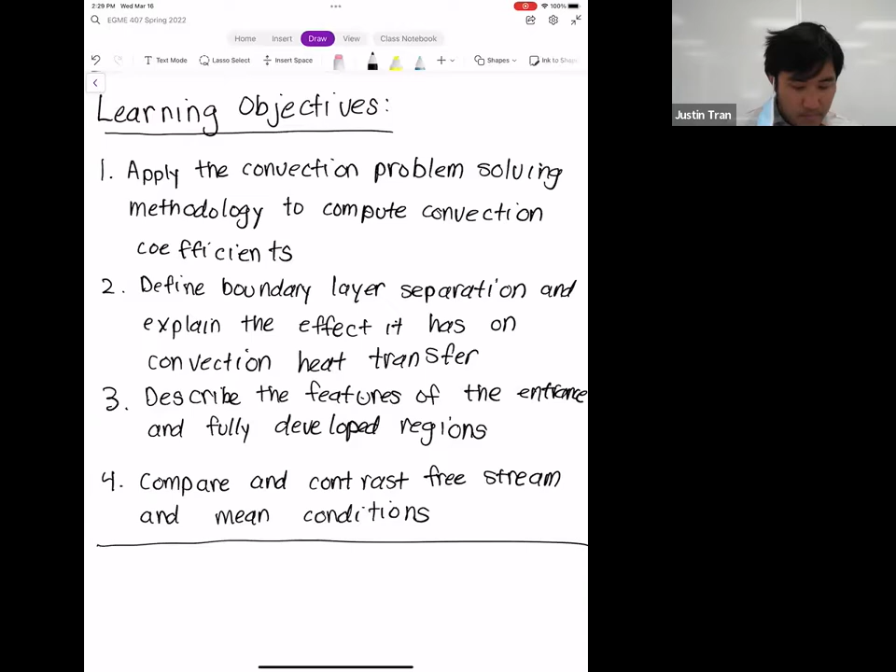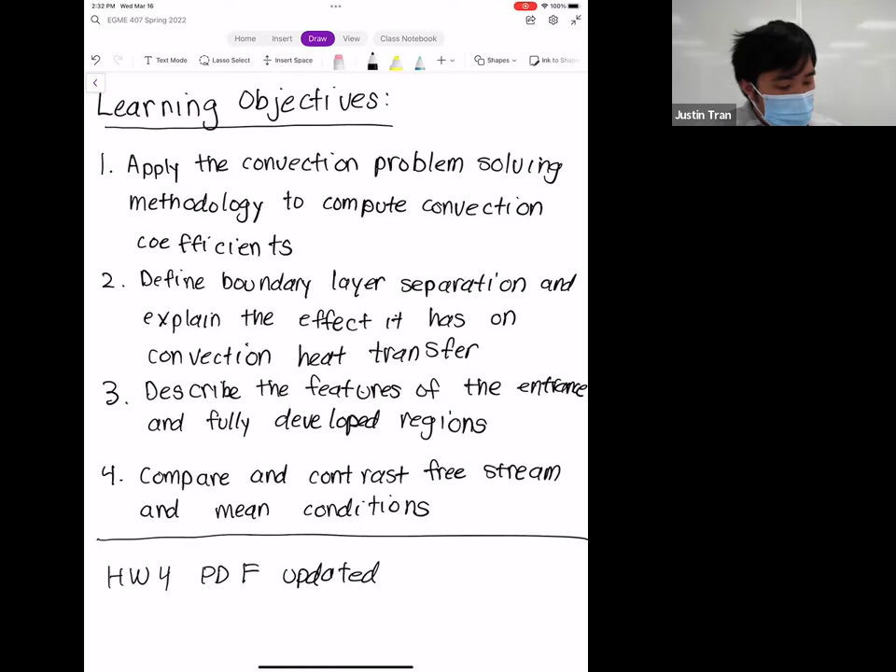Okay, let's go ahead and pick up where we left off. So the last thing we covered is what I call the convection problem solving recipe. A lot of convection problems will break down into these five separate steps.

The first thing you're going to do is identify the geometry. Next, compute the film temperature, where remember the film temperature is the temperature at which you evaluate the fluid properties. Third, you compute the Reynolds number, and use that Reynolds number inside the Nusselt correlation. Then you use that Nusselt correlation to compute convection coefficients and all that good stuff. This should be from the end of the notes last time.

I don't want to write it again, but I do want to jump into an example which shows this process in action. Let's go ahead and jump right into it then.

I like this example a lot, it's one of my more favorite examples in the class because I think it's pretty practical. I haven't done this before, but I do aspire to do this one day. This could help you in designing your own rig. If you're interested in PC gaming like I am, probably one thing you've thought about at some point is designing your own PC, and part of that is designing the cooling system. So we're going to be designing that in this problem.

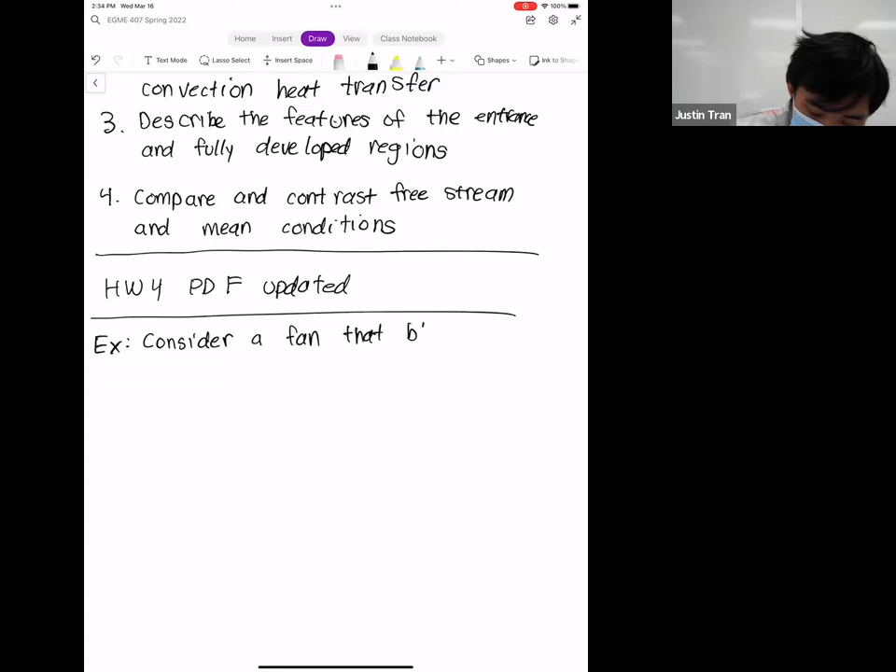In particular, we're going to be worried about the design of the fan that's going to blow air over our fin. This fin might be something like a thermal sink that you use on your computer to cool it. Anytime you build a computer, you have to have some kind of air cooling, or some use water as well, to cool your parts.

What we're interested in this problem is computing how fast the air velocity needs to be in order to properly cool our part. So the velocity here is going to be unknown. What we do know is that the air temperature is going to be a cool 20 degrees C.

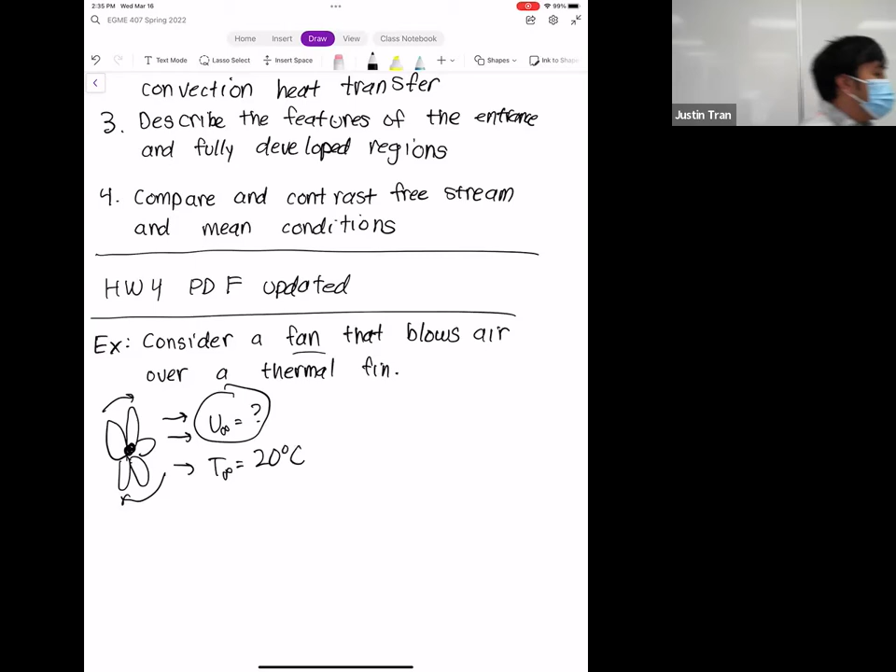And what this is going to be cooling is, the only geometry we can do so far is a flat plate. This flat plate is going to represent some kind of fin, and it's going to be at a constant surface temperature Ts, where the surface temperature of this fin is going to be 45 degrees C.

Let me give you some geometric properties. The length of the fin is going to be 10 centimeters, and the width of the fin going into the page—assuming it's a rectangular plate—is going to be 5 centimeters.

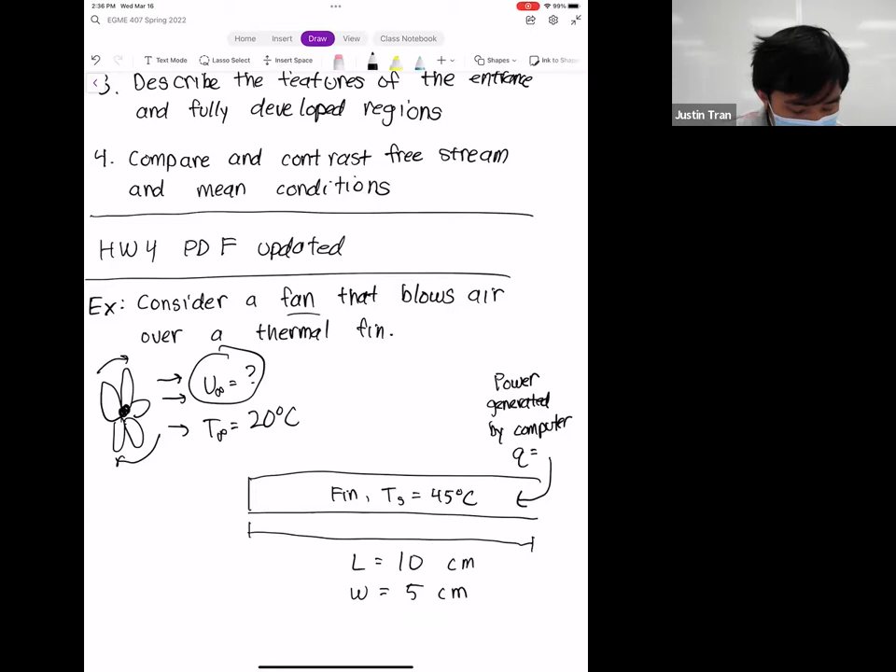Not only that, we also know the amount of power being generated by the computer, and that power needs to be dissipated in the form of heat. One way we can model that is to say that the Q coming in is going to be equal to 5 watts. We're interested in seeing how fast the air needs to go to offload that 5 watts of heat.

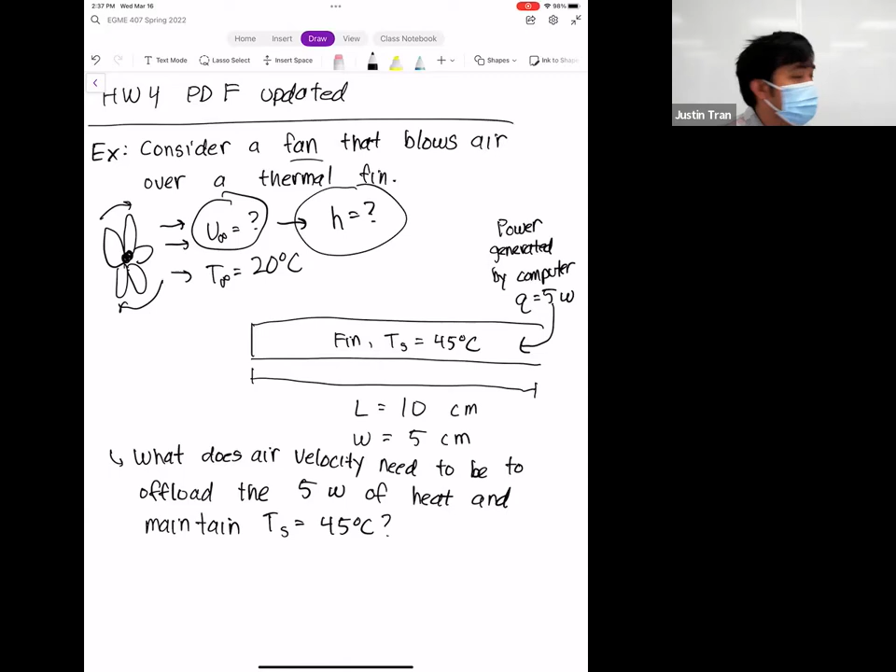It's going to be the amount of air velocity we need to offload that 5 watts, but also to maintain that surface temperature of 45 degrees C. It's a little bit not as direct as some of the previous problems we've been doing, because we're solving for velocity here. But what this essentially is, is solving for what the convection coefficient has to be in order for this situation to work out. It may not be as direct as before, but this fits into our category of convection problem solving, so we can apply the convection problem solving recipe to solve it.

Any questions with the problem setup? Okay.

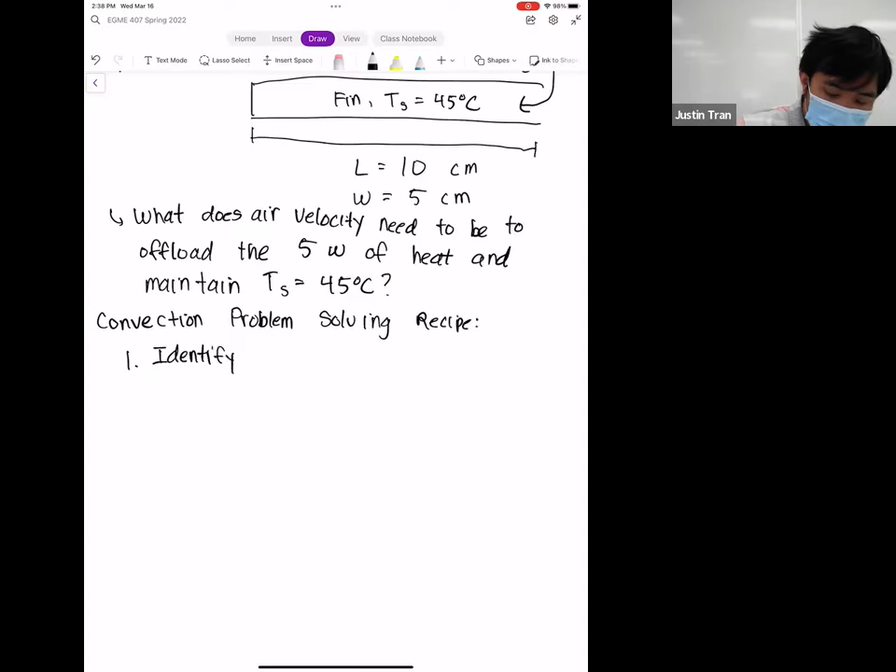All right, so let's start with the recipe then. Step one of the recipe is to identify our geometry. Again, this is probably the most skipped step in this entire process, but I do want you to actually write this down. Here it's a little bit obvious since we've only gone over one geometry so far, but it's always good to write it down. Our geometry in this case is one of a flat plate, and you can identify that from the figure of the problem.

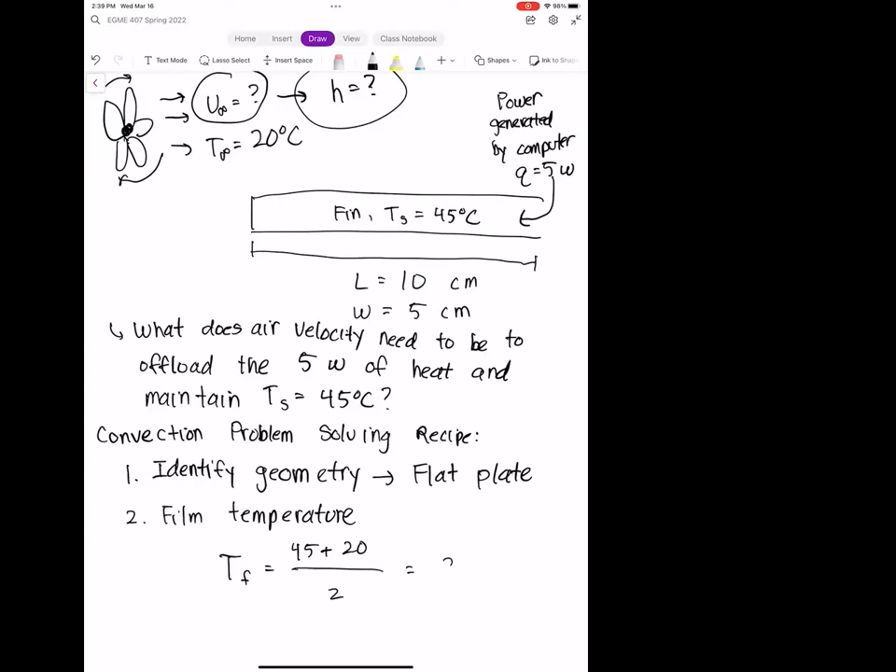So the next thing we're going to compute is the film temperature. Remember, the formula for that is the average between our surface temperature and our fluid temperature. Our surface temperature here is 45, our fluid temperature here is 20 degrees C, and we're going to divide this by 2. We get a film temperature of 32.5 degrees C, and that's the average fluid temperature between the free stream and the plate.

All right, so the next step is we're going to evaluate the air properties at this temperature. You can do that a couple of different ways.

If you have the textbook, you can go to table A4 in the back of the book. Or you can use the online fluids calculator I showed you last time. I put a link to that fluids calculator on the homepage of our course website too, so you can click the link there.

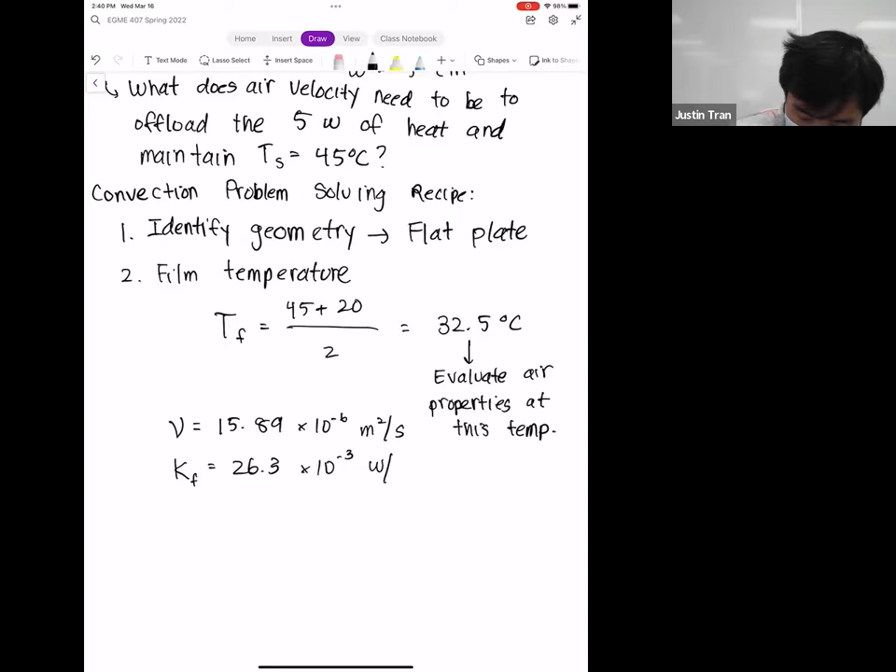If you compute those or look those up, you end up with a kinematic viscosity of 15.89 times 10 to the minus 6 meters squared per second. We get a thermal conductivity of 26.3 times 10 to the minus 3 watts per meter Kelvin, and you get a Prandtl number of 0.707.

All right, so that's great. Now that we have the fluid properties, we can move on to the next step.

The next step is to compute the Reynolds number. Remember the formula for the Reynolds number is U infinity multiplied by the length divided by nu.

Here's where this problem is going to be a little bit different, because usually at this point you'll have everything you need to plug in to find the Reynolds number. But for this problem, we don't have everything, because what we're solving for is U infinity, and we don't have that because we're solving for it. So we can't solve for this yet.

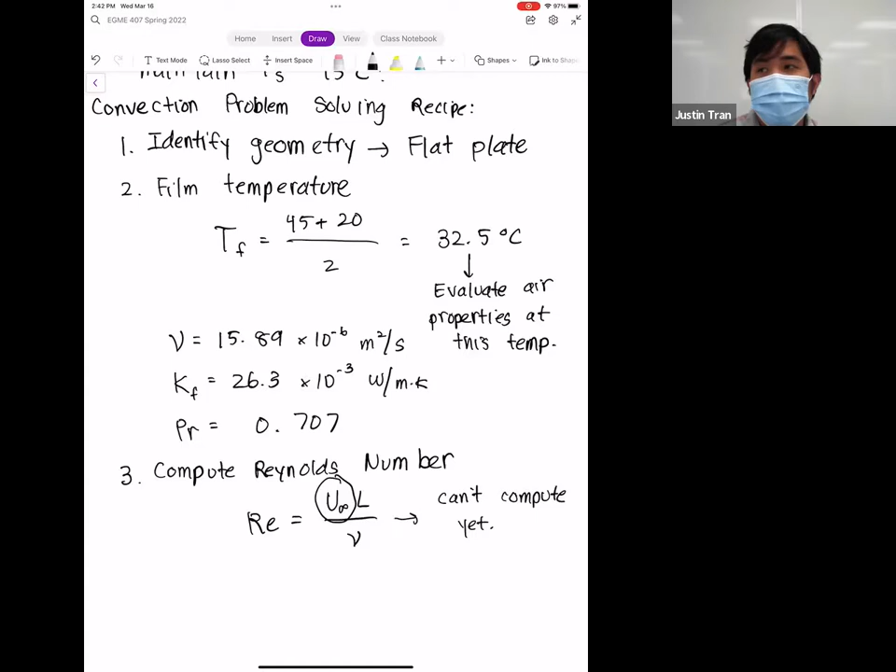And that presents a little bit of a problem for us, because at this point we have to make a decision on whether our boundary layer is going to be laminar or turbulent. But without the Reynolds number, we can't really make that determination definitively.

So at this point, we're going to make an assumption. Just because it's a little bit easier to deal with, we're going to assume that it's laminar.

Later on, once we solve for the velocity, we're going to go back and verify that it's actually laminar. So if you ever run into a situation like this where you have to make an assumption of whether it's laminar or turbulent, a lot of times it's good to take a step back and look at your physical situation.

Our physical situation here is basically the flow of air inside a computer. It's a fairly confined space, and those fans aren't like those mega fans you find in a Dyson vacuum. It's just one of those little dinky fans that are blowing air, and those things can't really blow air super fast.

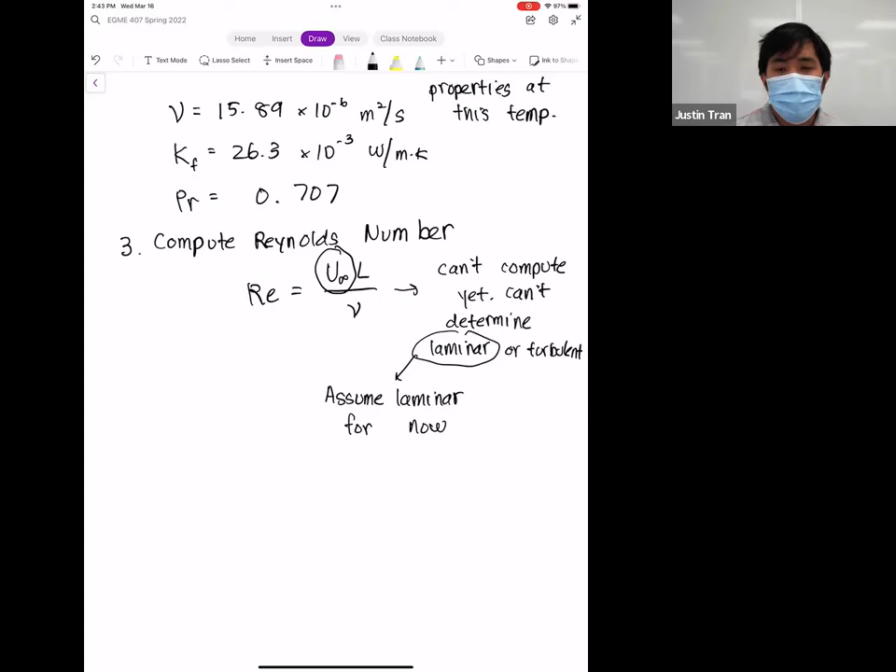Based on the fact that our space is relatively confined and our velocities are probably going to be relatively low, the laminar assumption is pretty reasonable here. In fact, I'd be pretty surprised if you ever got the flow to be turbulent in such a small space. So we'll assume laminar for now, but we'll go back and verify it later.

So let me pause here. Are there any questions on this so far? Yeah.

It depends on the situation, but for a lot of the problems, and for the homework problems especially, you'll have the velocity already. At that point in the problem, if you have the velocity, the length, and the viscosity too, you can just compute outright what the Reynolds number is. But for situations where you do have to make an assumption, just look at the situation.

Let's take another extreme: say you're looking at airflow over an airplane. The airplane's going really fast and it's really big, so in that situation I'd say it's most likely going to be turbulent, and the assumption of turbulence will be good in that case.

Most of the time you won't have to make this assumption, but we're going to do that here for this problem. Okay, so let's go on to the next step.

So the next step is we have to make a determination whether we want a local Nusselt number or an average one.

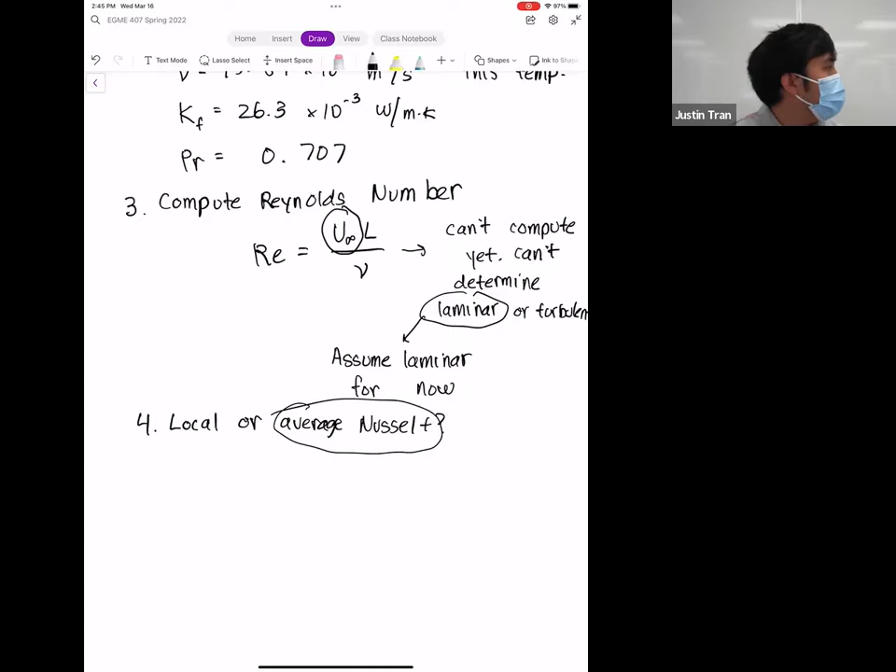Like I said last time, most of the time for most of these problems, you're going to want an average Nusselt number. Just because the nature of the problems we're looking at in this class, we're looking at systems as a whole. So if we go back to this problem, what we're interested in is the heat loss from this fin as an entire system. In situations like this, when you're interested in systems as a whole, most of the time you're going to want the average Nusselt number, which gives you the average convection coefficient.

Of course, there are situations where you want the local one, but for analytical methods like this, that's pretty rare, I'd say. So most of the time you're going to want the average. That's important because there are different Nusselt number correlations depending on whether you're working with the local or the average Nusselt number.

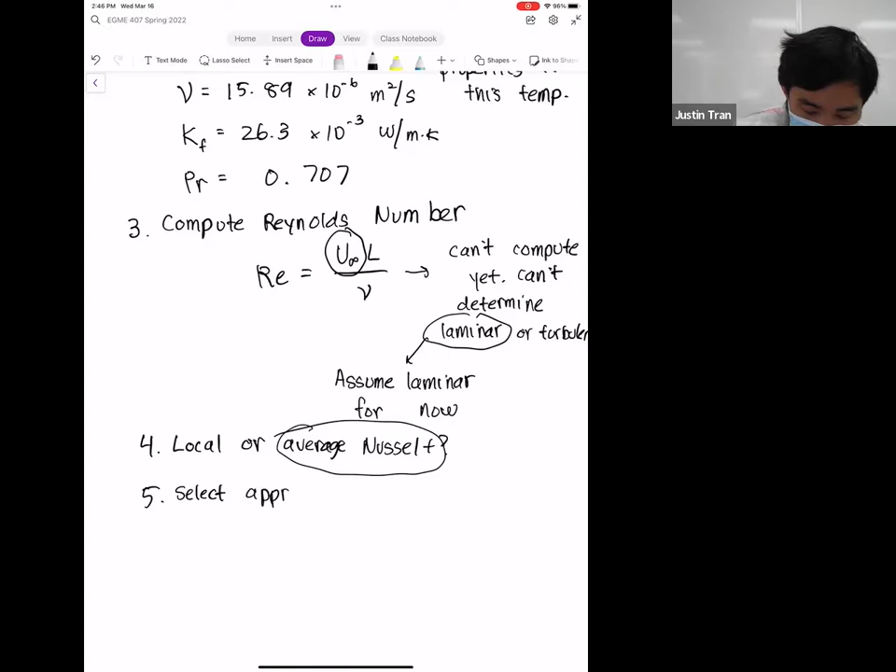So with that in mind, now that we know, or at least are assuming, that the flow is laminar and we want the average Nusselt number, we can go ahead and select the appropriate Nusselt correlation. Because remember, there are lots of different formulas out there for the Nusselt number, so you have to pick the right one for the situation. For this particular problem, we have laminar flow.

We want the average one, and our geometry is that of a flat plate. So we look at our list of all the Nusselt number correlations that we have, and we use the following one. Our appropriate Nusselt number correlation here is 0.664 times Reynolds number to the 1/2 power times Prandtl number to the 1/3 power. This is the correlation that corresponds to all of these conditions.

If we go off the definition of the Nusselt number, it's the convection coefficient multiplied by the length divided by the thermal conductivity.

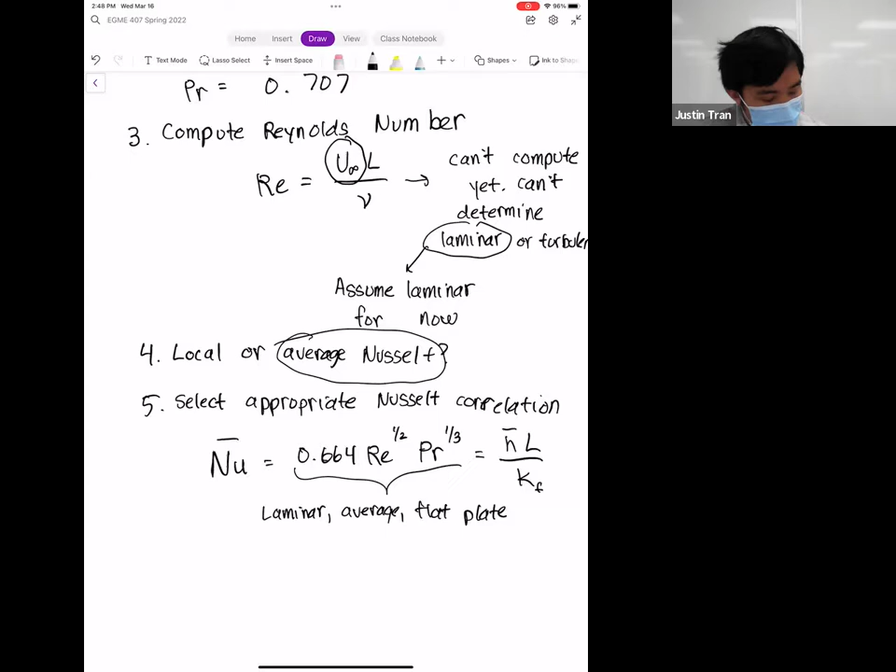And so here, we've made some good progress towards the result, but we still have a bit of work to do, because we don't know what the Reynolds number is yet, so we can't plug into this formula outright. But what we can do is use this expression along with other information we know from the problem to eventually compute that velocity. So to show that, let me plug in for the Reynolds number here.

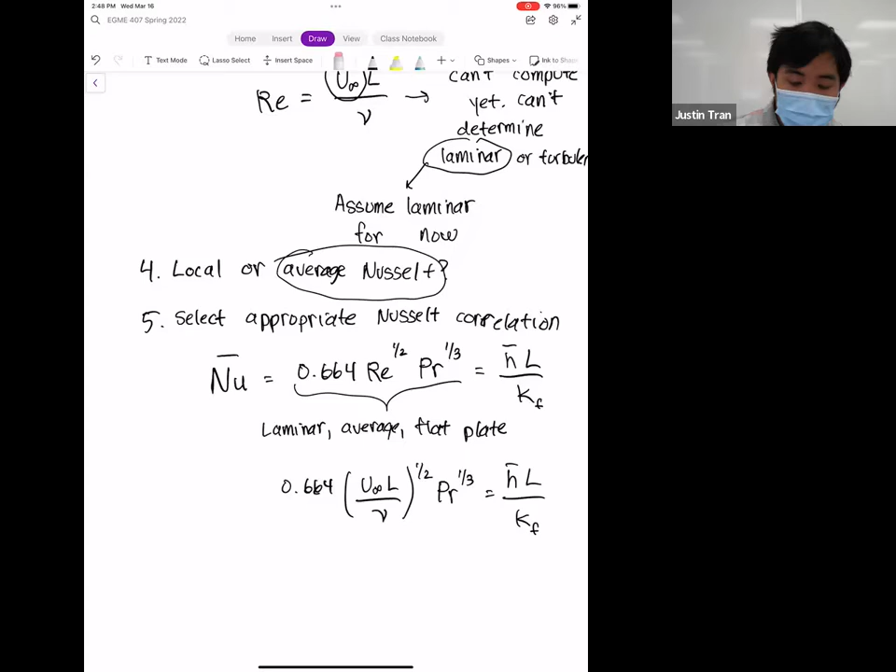If I plug in the expression for the Reynolds number, we see that the Reynolds number is U infinity times L divided by nu. We can see here that we finally have an expression where we can solve for U infinity, because remember, U infinity was our unknown. So let's take this expression and solve it for U infinity.

So let me divide both sides by 0.664 and the Prandtl number. What we have is U infinity times L divided by nu, to the 1/2 power, is equal to H bar L divided by 0.664 times Prandtl number to the 1/3 power times thermal conductivity.

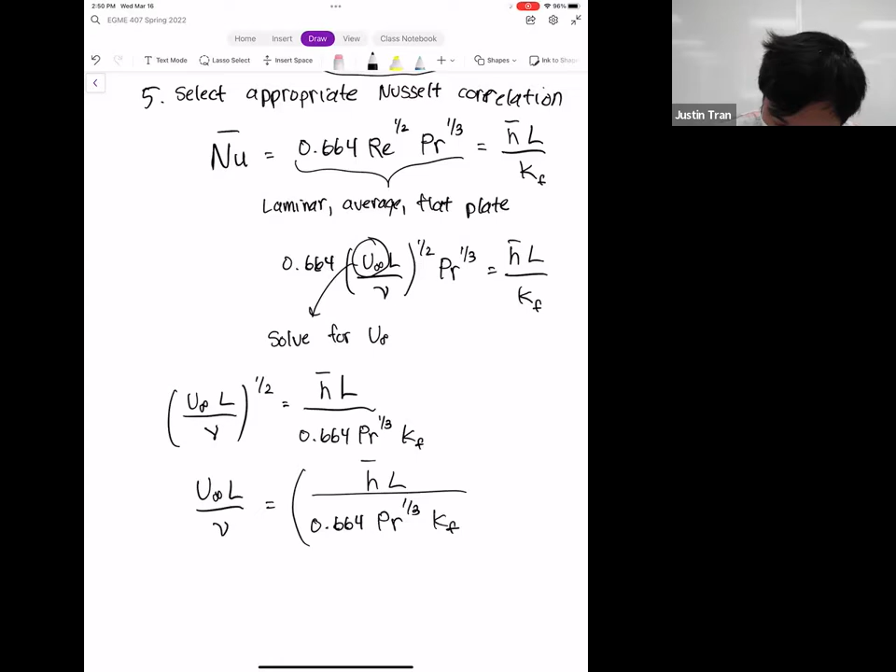So let's square it. If we square it, we get U infinity times L divided by nu is equal to the quantity H bar L divided by 0.664 Prandtl number to the 1/3 power, times Kf, squared.

And so let's isolate U infinity. Let's multiply both sides by nu and divide by L. In the end, what we get is U infinity equals nu divided by L, times H bar L divided by 0.664 Prandtl number to the 1/3 power, times Kf, squared. Of course you have an L squared on top and an L on the bottom, so you can cancel that if you want, but I'll just leave it in this form.

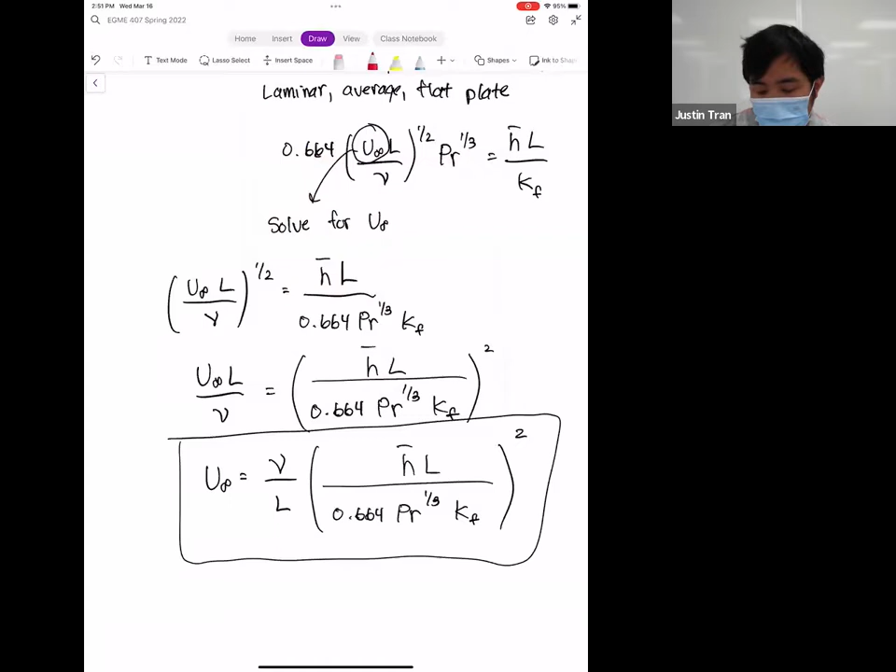So what we've done so far is that now that we know what Nusselt number correlation applies to this problem, we just use that correlation to solve for the unknown velocity. A lot of these quantities we can plug in: the kinematic viscosity, because we solved for that in step 2; the length we know from the problem; the Prandtl number and the thermal conductivity we also know from step 2. But the big elephant in the room, the one we don't know yet, is H bar. So in order to properly solve this problem, we need to solve for a value for H bar.

Except spelling is hard. Okay.

We're going to have to come up with a way to compute the convection coefficient based on the information that we have in the problem.

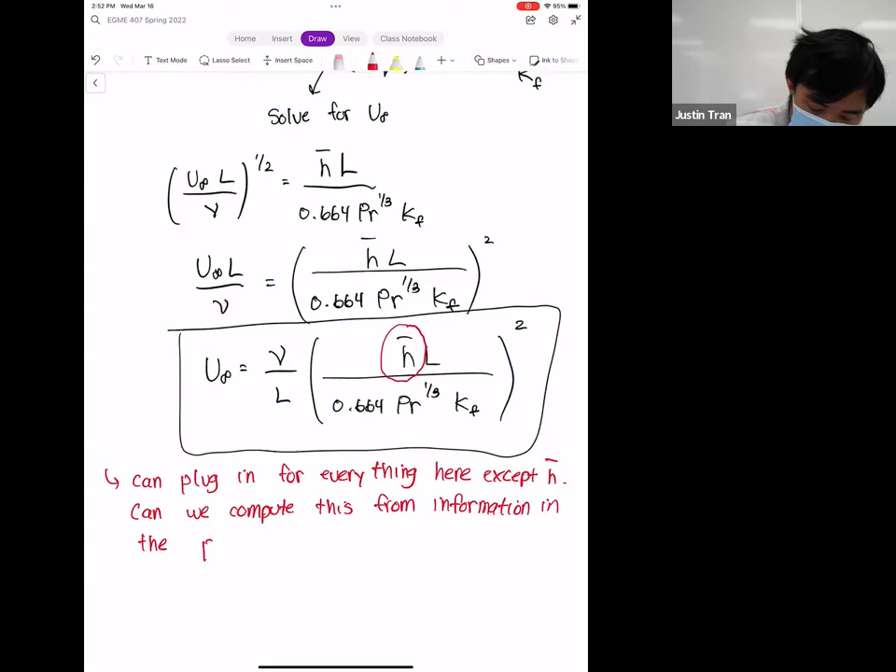If we can take the information that we have in the problem and use that to compute H, then we can just plug that in here and eventually solve for U infinity. Any questions on this so far?

Let's scroll back up here and look at the problem. What do we know from the problem? We know that the fin is going to have a surface temperature of 45 degrees C, and we know that the air surrounding it is going to have a temperature of 20 degrees C.

But we also have one other piece of information, and I kind of glossed over it really quickly, but that piece of information will actually be key in computing H. And that piece of information is the amount of power that's being generated by the computer.

So usually we don't have that. Remember, for most of these problems, what we're given usually is the surface temperature and T infinity, and based on those two, and also on the convection coefficient, we have to compute Q. In this problem I threw you a little bit of a curveball and gave you Q instead, and you can use that information however you want.

Since we have Q, we have TS, and we have T infinity, we actually have almost everything we need to plug into Newton's law of cooling.

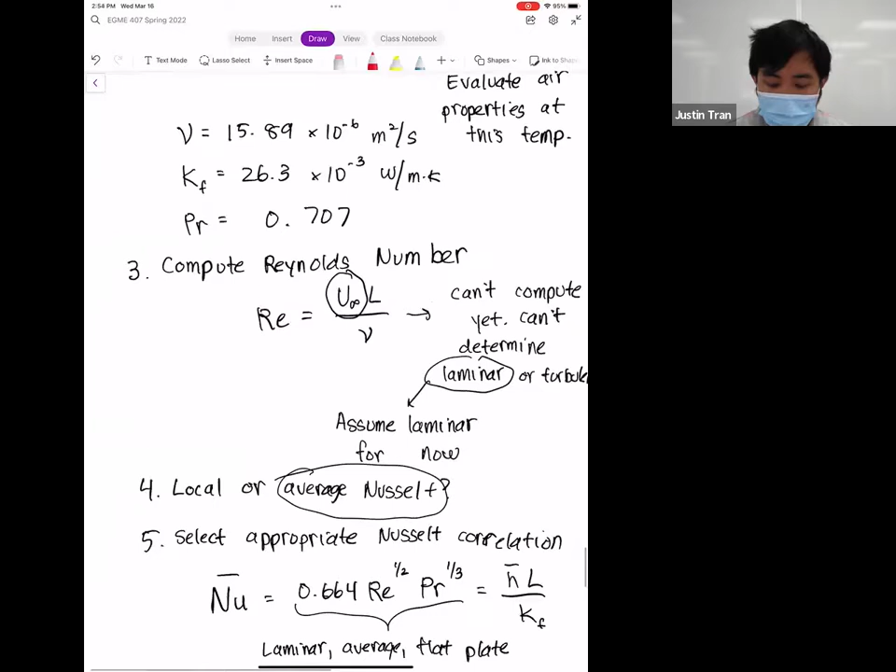What does Newton's law of cooling say? Newton's law of cooling says that the heat transfer due to convection is equal to H times A times the difference in temperature between the surface and the fluid.

Let's go through each term in this expression and look at which ones we know. Let's start with TS. We know TS is 45 degrees C. We know T infinity, that's the fluid temperature, so that's 20 degrees C.

Q, we actually also know as well. It's phrased a little bit differently. Remember, the problem phrases Q as the power that's generated by the computer. But that power has to go somewhere, it can't just go into the abyss. So what we're basically saying in this problem is that all the power being produced by the computer is coming out through the fin, and the only way that heat can come out from the fin is through convection. So we already have this one as well. The Q convection here is going to be the 5 watts generated by the computer.

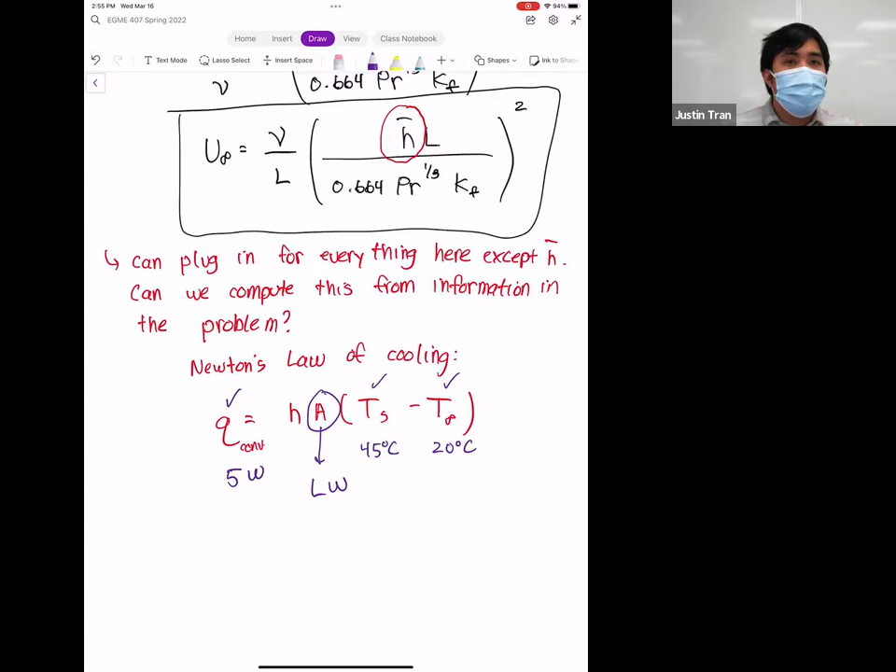We also know the area as well. The area is just going to be the length, because we have a rectangular plate, multiplied by the width of the plate. So L times W.

Now that we have an expression where we know everything except for one thing, we can use this equation to solve for that one missing thing. Let's solve this equation for H. What we get is H is equal to Q divided by L times W times TS minus T infinity.

This H that we compute here encompasses the entire fin, so this is exactly the H bar that we're looking for. We can take this H bar and plug it in back up here, and once we plug that H bar in, we'll have everything we need on that side of the equation. Now that we know H bar and everything else here in this formula for U infinity, we can plug it all in and solve for the velocity.

It's a lot of plugging in, a lot of numbers, so I'm not going to go through the whole thing. What we get is a U infinity of around 10.5 meters per second.

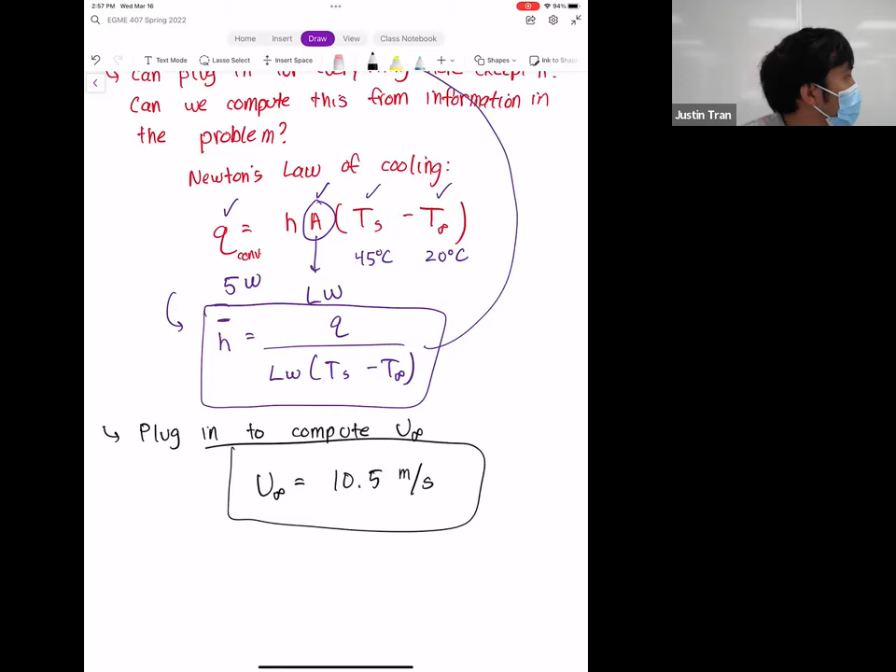And so the fan that you buy for your computer has to have a speed fast enough to at least produce a 10.5 meters per second wind speed. If you can buy a fan that does that, then your computer will be optimally cool and you can game as much as you want.

All right, so one last thing I want to check for this problem. Remember, the key step we made here is we had to assume that the flow was laminar. So let's just check to make sure that's the case.

If we plug in, we have the Reynolds number equal to U infinity multiplied by L divided by the kinematic viscosity. You plug all that in, we get a Reynolds number of 6.61 times 10 to the 4th.

And if you recall from last time, the critical Reynolds number for external flow like this is 5 times 10 to the 5th. So since we're less than that, and since we're only 6.61 times 10 to the 4th, we're good here. So this flow is confirmed to be laminar.

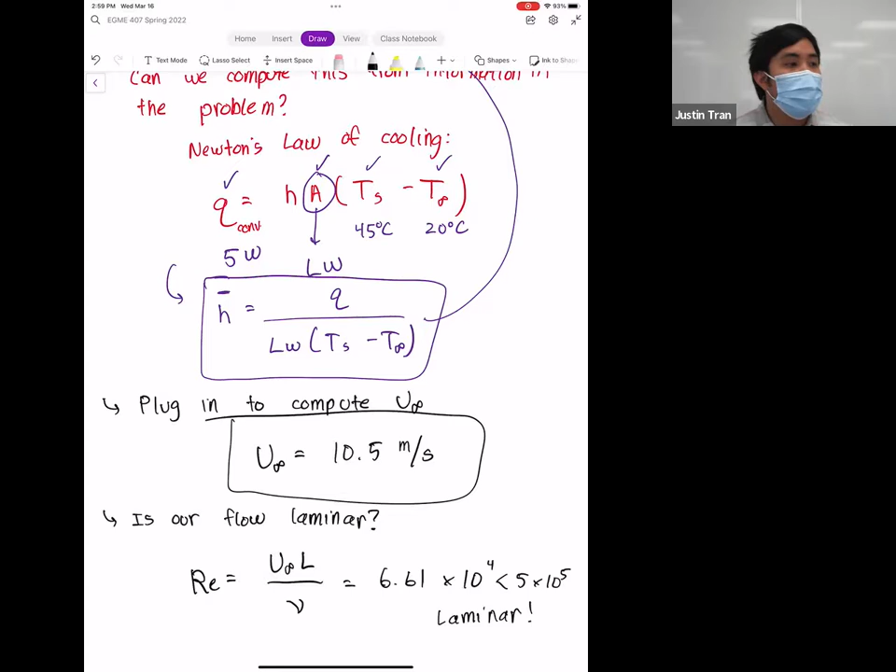All right, so that was quite an involved example. I wanted to make sure I go through it slowly and through every step because I think this is a cool one. It's maybe not the most straightforward application of the recipe because we had to do a couple additional steps, but I think it's a good demonstration of what these problems can be like.

All right, any questions on this example?

Okay, all right, and so that's going to do it for the flat plate, and so we're basically done with that flat plate geometry. Now let's start introducing some other flow geometries into our mix. One that's really important for the design of a lot of systems is the so-called cylinder in cross flow.

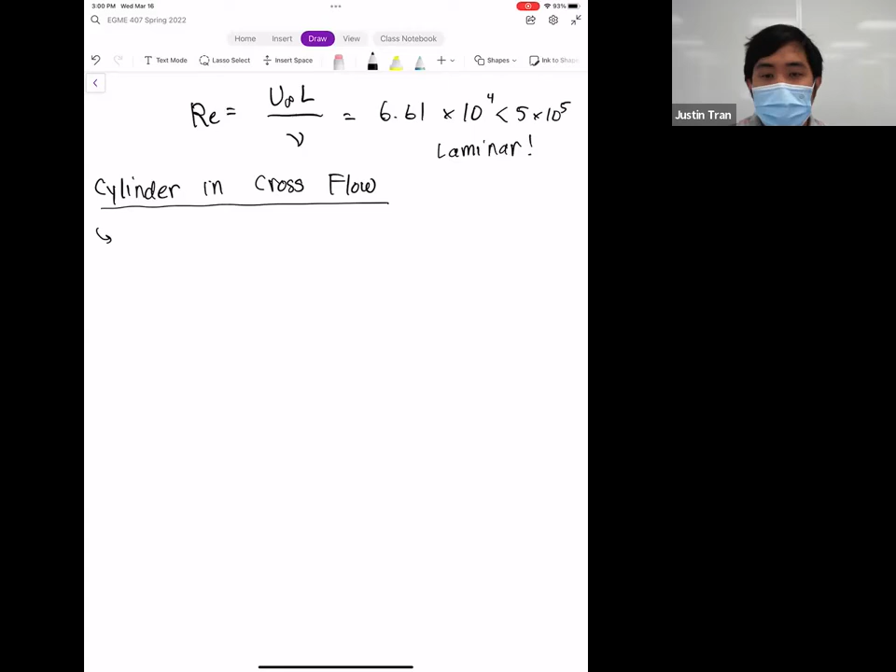All right, and so the important thing I want to note, because people get confused about this every single year: the next unit that we're going to go over after this is internal flow. One of the more common situations for internal flow is flow through a cylindrical pipe, that's flow inside a pipe. This cylinder in cross flow is flow outside a pipe.

So think about a pipe that's sitting on the outside, say on top of a building. You have wind flowing over the pipe, so you have convection occurring on the outside. That's the situation we're looking at. And for the flow of water inside a pipe, we'll do that maybe at the end of today if we have time, but definitely next week.

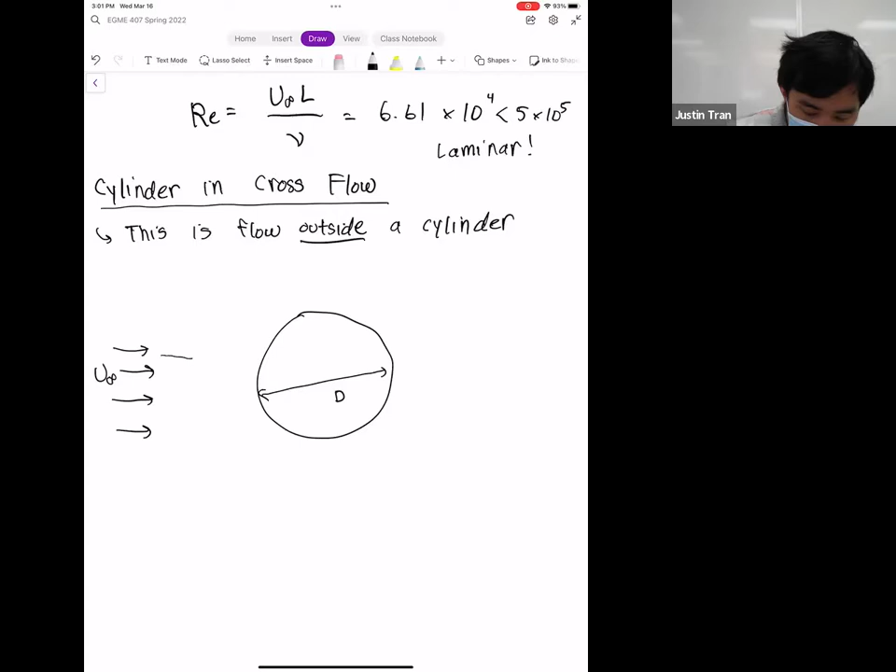All right, and so the situation looks like this. Here we have our cylinder, which has a certain diameter. We have flow that's going to be hitting the pipe from the outside. And what's interesting about this, more so than the flat plate, is that the velocity will kind of have to go around the cylinder. So you get streamlines that kind of look like this.

I like to go over this one because if you work in any kind of system that uses pipes, how you insulate the outside of those pipes from air and the weather is an important design consideration. So besides the flat plate, I think this is an important one for us to do.

All right, so what's unique about this geometry? Relative to the flat plate, of course, we're going to have different flow patterns. And since we have different flow patterns, that means our Reynolds number correlations are going to be different. So we're going to have different ways to compute the Reynolds number.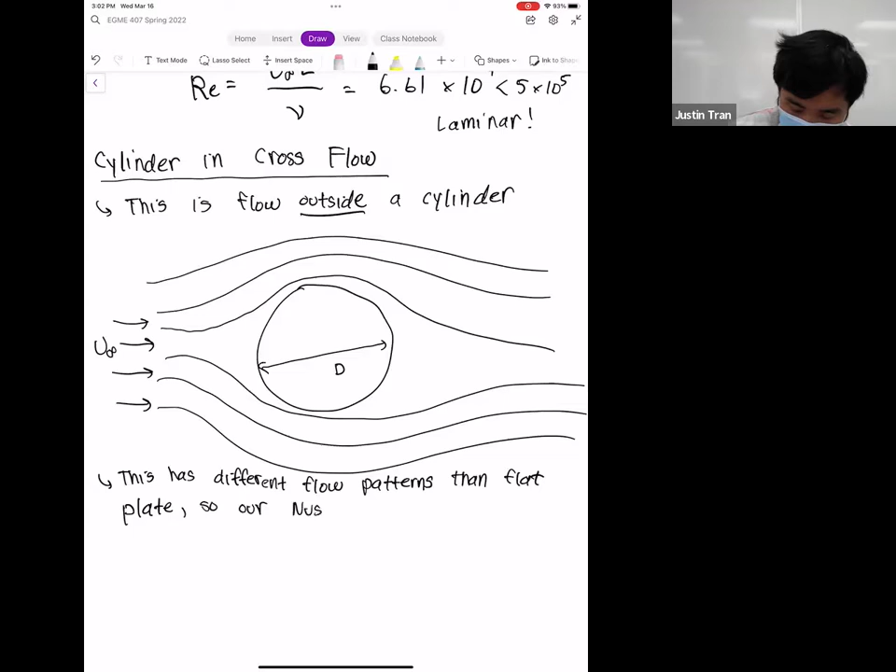And one of the principal ways that the flow patterns are different is we're going to have a new phenomenon known as separation.

Did you guys talk about boundary layer separation in your fluids classes before this? Mostly you've just heard the term before. Okay, that's good. So if you're curious, you've probably heard of stall in an airplane - that's when the plane goes up and just stalls, falling out of the air, which is terrible. One of the reasons stall occurs is because you have a boundary layer that separates from the plane. If you're interested in aerodynamics at all, boundary layer separation is something you'll be studying a lot. But here we're going to talk about the thermal effects of separation.

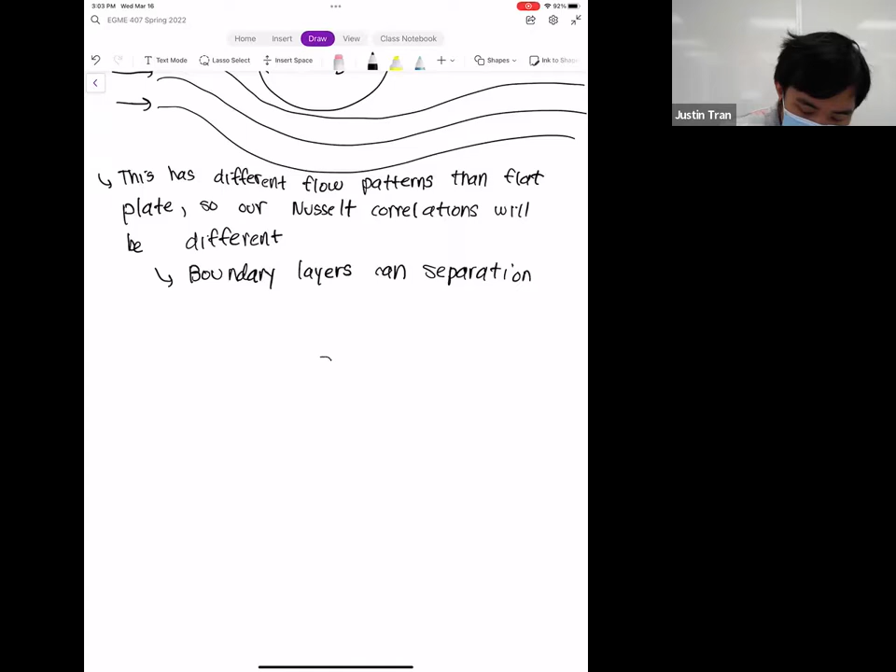I think the easiest way to illustrate this is with a picture. Let me draw our cylinder again, and we have flow coming at it. Just like the flat plate, whenever you have flow striking a surface or moving past it, you're going to have a boundary layer that forms. Let me draw the boundary layer with a different color to make it clear. Remember, the boundary layer is this thin layer of fluid that acts as a transition between the solid surface and the fluid. So here is our boundary layer.

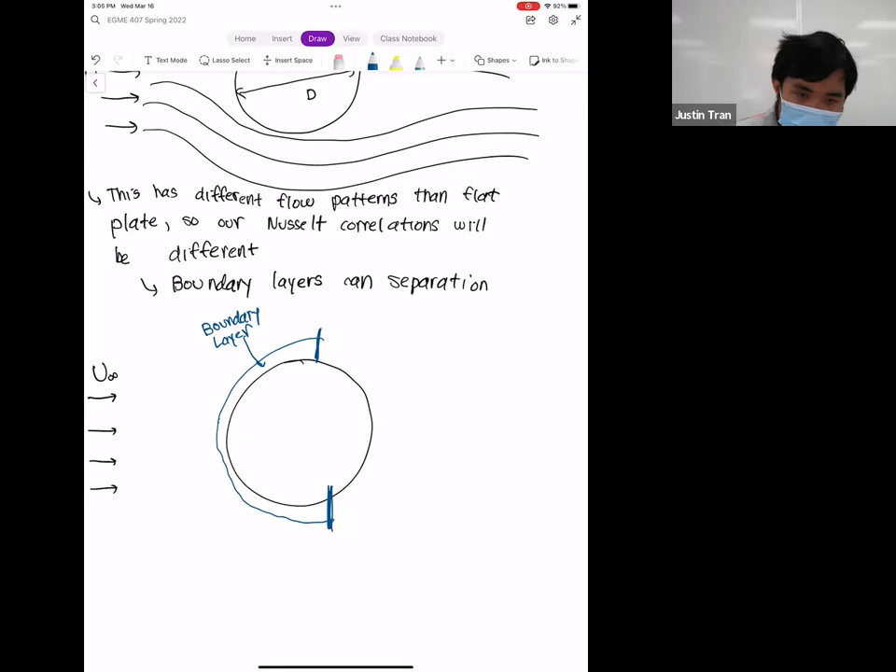Normally what we expect from the boundary layer - in the flat plate, remember it always stayed attached to the surface. There's always this thin film of fluid that stayed attached to our flat plate. But because of the geometry of the cylinder, most notably around this area, I stopped the boundary layer here on purpose - imagine that's the symmetric place on both sides. The fluid has to make an inward turn here. If you compare the front of the cylinder to the back, it's easy for the fluid to go around the front because the fluid is always colliding with the surface. The fluid wants to go from left to right, but as it does, it collides with this surface, and then it's forced to turn to go around.

But once the fluid makes it over the top, there's nothing really forcing it to stick to the surface, so you have a fundamental difference. If you're going to ask the fluid to turn this way, to stay with the cylinder more, it doesn't really want to because ultimately the flow wants to go from left to right. Once it gets past the top of the cylinder, nothing's really getting in its way anymore. So instead of staying attached to the cylinder, what tends to happen is the fluid just continues on like that.

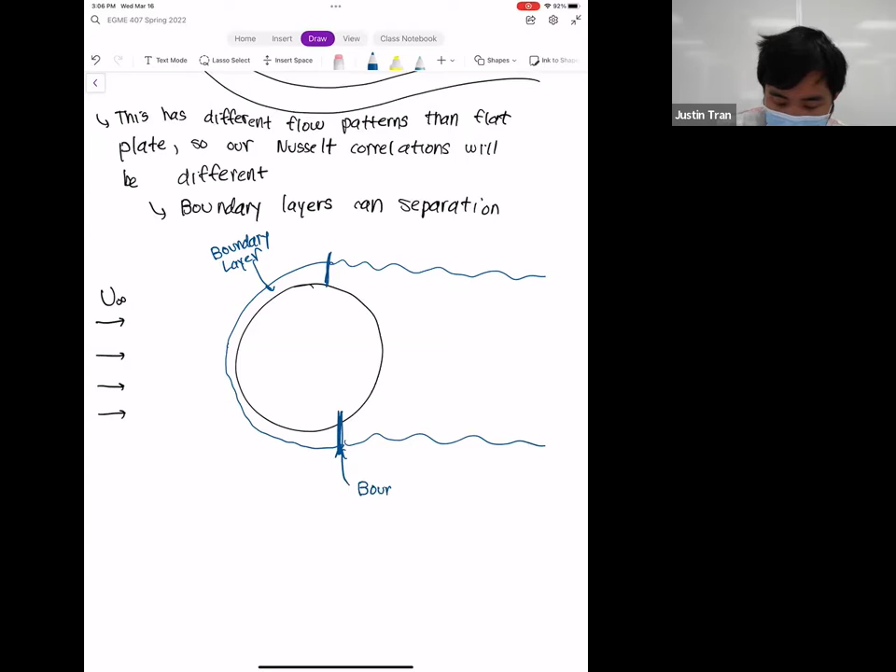It's at this point when the boundary layer leaves the surface - this is what we call boundary layer separation. After the boundary layer separates, it creates a region on the back of the object known as the wake. This is something you're probably familiar with - if you've ever looked at a boat sailing through the water, there's always that region behind the boat. Because of how boats are designed, the wake keeps growing in a cone like that. That wake that forms is a direct result of boundary layer separation.

So why am I bringing that up? Because this is a heat transfer class, and why do we care so much about these fluid mechanics? Well, the fluid mechanics in the wake are very different. I'll try my best to illustrate that here. If you compare the flow situation before the cylinder and in the wake, in the wake you have flow that's circulating - it's slow, and it's a little bit chaotic. It's not quite turbulent, but it is a little more chaotic than before.

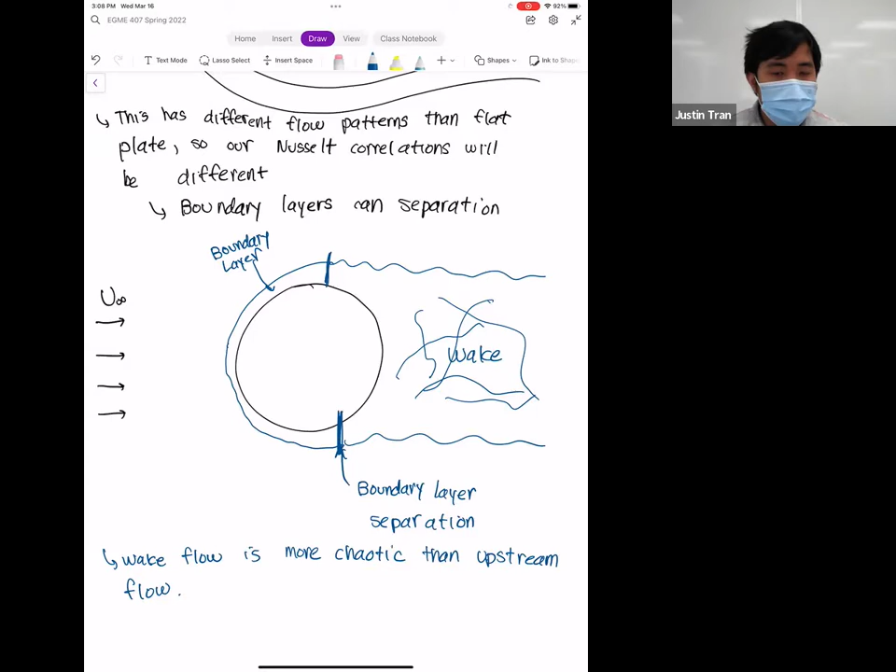So you have a few more vortexes that form, a few more whirlpools that form inside this region, compared to upstream where you have more uniform velocity patterns. What do we know about when the flow turns chaotic? We know that when the flow turns chaotic, this actually enhances heat transfer. So convection is enhanced in the wake.

And so from that perspective, it's important to know that the amount of convection we have is going to change depending on how big our wake region is going to be.

Any questions on this? So the situation I've shown you here is for laminar flow. When you have laminar flow, the flow separates at the tops and bottoms of the cylinder, approximately. It actually happens a little bit before that, but for all intents and purposes, let's say it occurs at a 90-degree angle.

Basically, once the flow tries to make that turn, it just can't do it anymore. Let's sketch what the situation looks like for turbulent flow. Whether the flow is laminar or turbulent, it's going to change the location of separation. So turbulent flow separates at a different point, but the question is, is the flow going to separate before the 90-degree point, or after? What do you guys think? Before or after?

So when you have turbulent flow, even though it's more chaotic, ultimately its Reynolds number is higher. One thing you can say is that turbulent flow has a lot more kinetic energy because it's naturally faster. And what that kinetic energy allows it to do is allow the flow to do some maneuvers that it couldn't do elsewhere.

Another way you can look at boundary layer separation is that it takes some energy for the flow to make this turn, right? Because ultimately, what the flow wants to do is keep on its course, going from left to right. But once it hits the cylinder, it has to make a turn because the cylinder is making it do it. But once it reaches a point where it doesn't have to turn anymore, it's out of there, and it forms a wake.

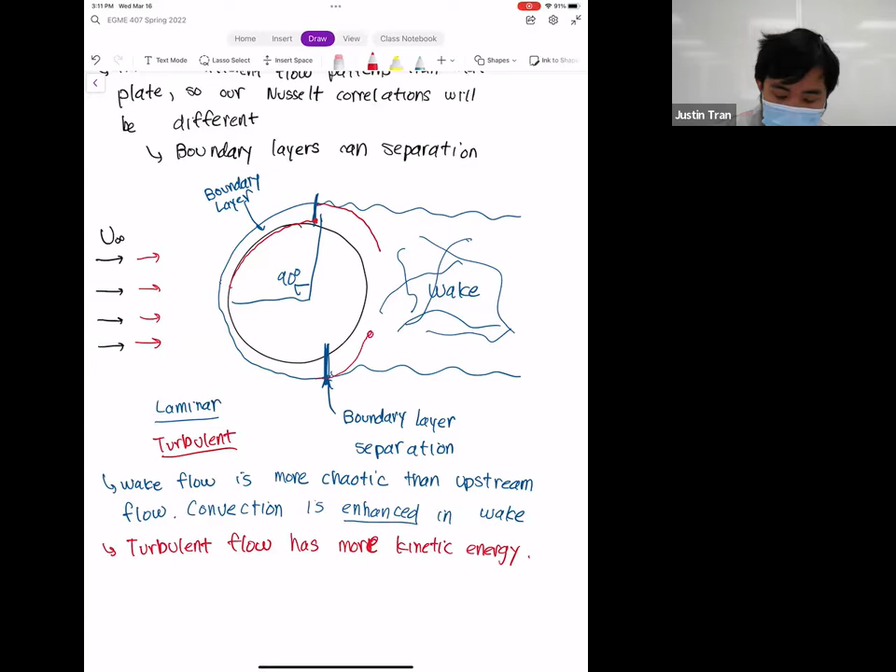Turbulent flow, on the other hand, has a lot more energy, and that allows it to maintain the boundary layer for a little bit longer. So what you see for turbulent flow is that the boundary layer actually separates after the 90-degree point.

And if the boundary layer separates later, this results in a smaller wake.

If you have a cylinder or any kind of blunt object, a lot of the fluid mechanics we're talking about here applies to any kind of blunt object -- the opposite of an aerodynamic object, the opposite of a Lamborghini. Think of that weird Cybertruck that Tesla has. So you have a smaller wake, but even though the wake is smaller for turbulent flow, you're still going to get enhanced heat transfer overall if you have turbulent flow.

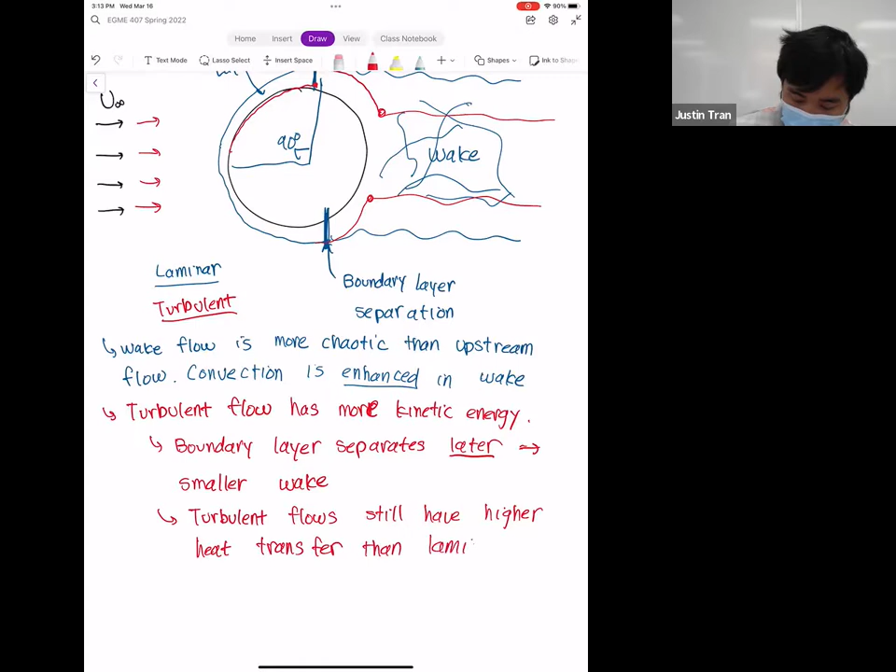I should say overall. And so even though we know the wake enhances heat transfer, you'd think that if you have a smaller wake, you're going to have less heat transfer. But the effects of turbulence are so strong that they overcome that wake effect. Because of that, we have a few competing factors here, and the relationship is not exactly as straightforward.

It's going to be a little bit different than our flat plate case, where for the flat plate we had one correlation for laminar and one for turbulent. Here we have to do it in different regimes because the wake is changing size, but the boundary layer is also changing characteristics, so it's a more complicated situation. We have a more complicated Nusselt correlation as a result. Any questions on any of this?

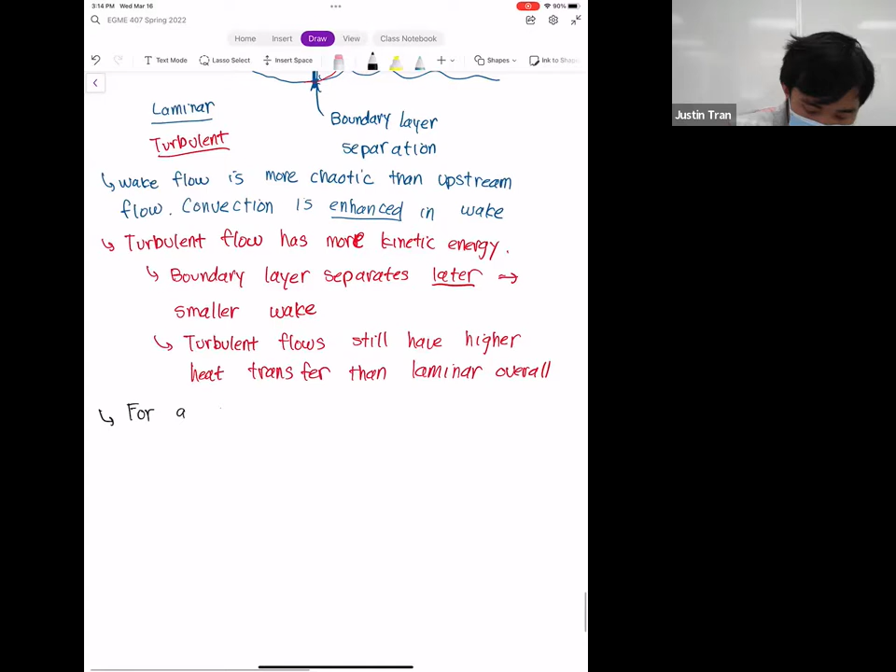This is all just pure fluid mechanics, and I always love talking about fluids. With all that in mind, now that we have an idea of what the fluid mechanics look like, that'll motivate our formula for the Nusselt number, for a cylinder in cross flow. Our average Nusselt number takes the following form.

Our average Nusselt number is going to be C multiplied by the Reynolds number with respect to the diameter, raised to the m power, times the Prandtl number to the 1/3 power.

Okay, so there's a few things I need to point out with this equation. Let's take them one at a time.

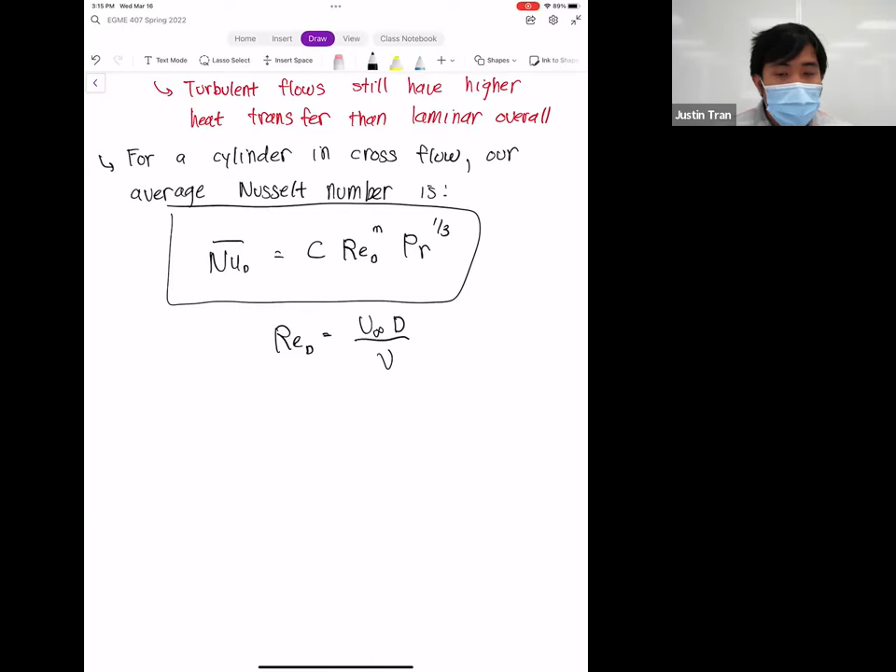First thing is the Reynolds number. In this case, it's the Reynolds number defined with respect to the diameter. So when we compute it, we use the diameter of the pipe: U infinity times D divided by nu. That's a little different because we don't use the length of the pipe or plate, we just use the diameter of the cylinder.

So that's the Reynolds number. Now we have the constants C and M. The values of C and M depend on what the Reynolds number is, and it's a bit more complicated than our flat plate case. If the Reynolds number based on the diameter is between 0.4 and 4, the value of C is 0.989 and M is 0.33.

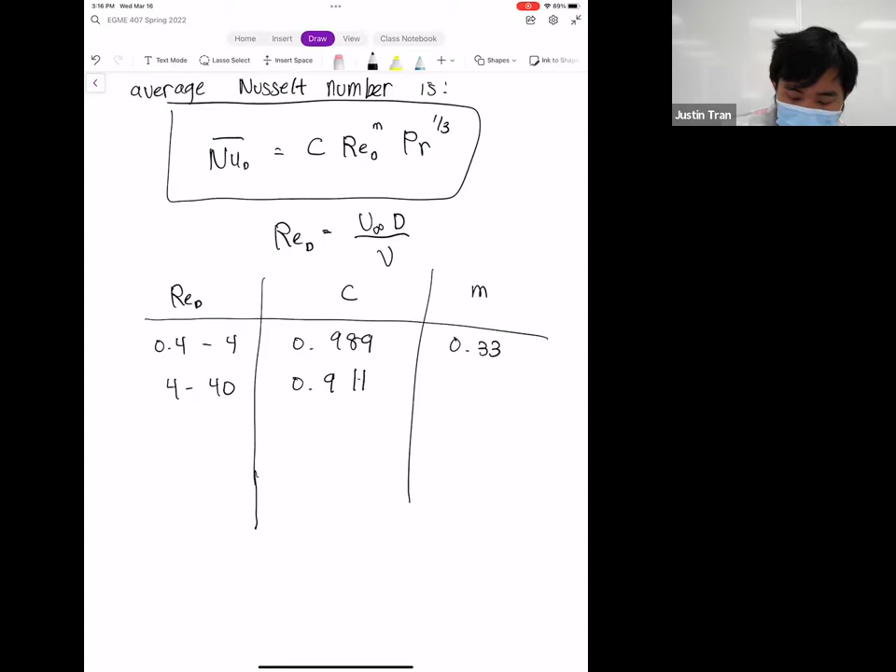Our next regime is between 4 and 40. If your Reynolds number falls within that range, the C value is 0.911 and the M value is 0.385.

The next regime is between 40 and 4,000. In that case, the C value is 0.683 and the M is 0.466.

The next regime is between 4,000 and 40,000. In that case, the C value is 0.193 and the M is 0.618.

The last regime we'll look at is between 40,000 and 400,000. Here the C value is 0.027 and the M value is 0.805.

So it's a bit more of a complicated case, again because the fluid mechanics is just a little more complicated here. You're going to have to use this correlation, but also refer to the values in the table depending on what the Reynolds number is.

If you notice, as the Reynolds number goes up, the value of C goes down, but the value of M goes up. That matches the same trends we saw in the flat plate: once we went turbulent, the coefficient in front went down, but the exponent on the Reynolds number went up.

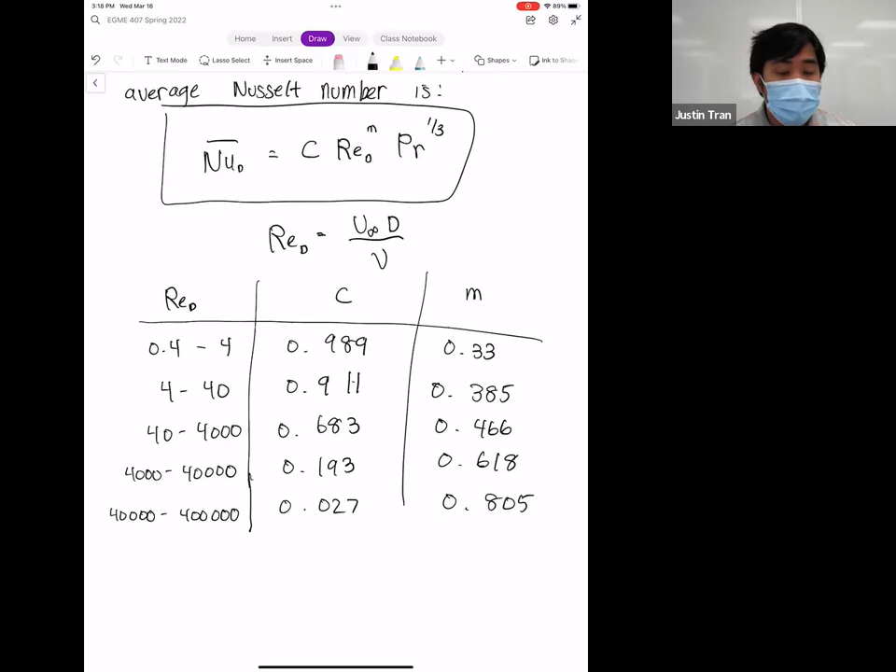Any questions on this before we do an example? Yeah, it's a D. Yeah, so that's to refer to the fact that this is the Reynolds number based on the diameter of the cylinder.

Okay, all right, so let's do an example just to see it all in action. The nice thing about this example is that it's a more classical case of the convection problem solving methodology.

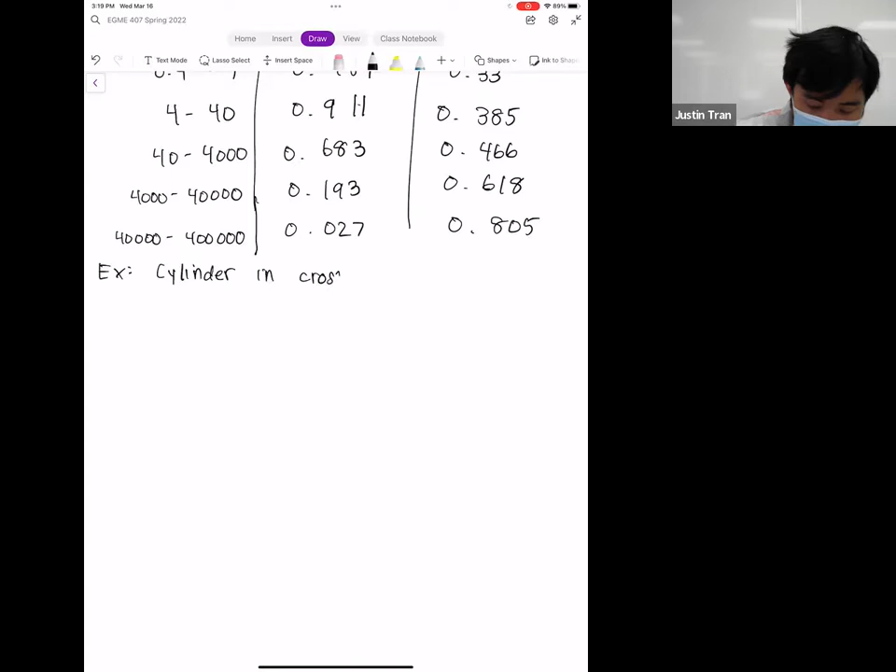Here we're going to have just a classical cylinder in cross flow. Remember, this is flow on the outside of the cylinder. All right, so here's our cylinder.

We'll do something a little different this time: instead of air, we're going to run water at this. So our fluid here is going to be water, and it's going to have a U infinity of 0.1 meters per second, and the T infinity is going to be 12 degrees C.

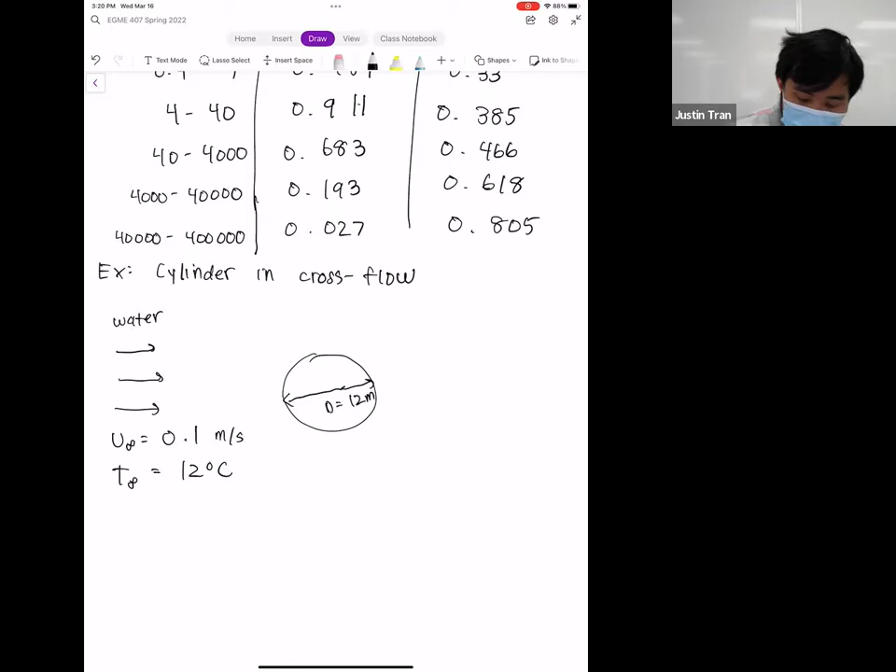The diameter of this cylinder is going to be 12 millimeters. We also know the length of the cylinder, and the length of the cylinder into the page is going to be 80 millimeters.

And we also know the surface temperature. The temperature on the surface of the cylinder is going to be 50 degrees C.

In this problem we're interested in two things, but they are very closely related, so once we compute the first thing, we can get the second one. We're interested in computing what the average convection coefficient is, and then once we compute that, we can compute the rate of heat dissipation from the cylinder.

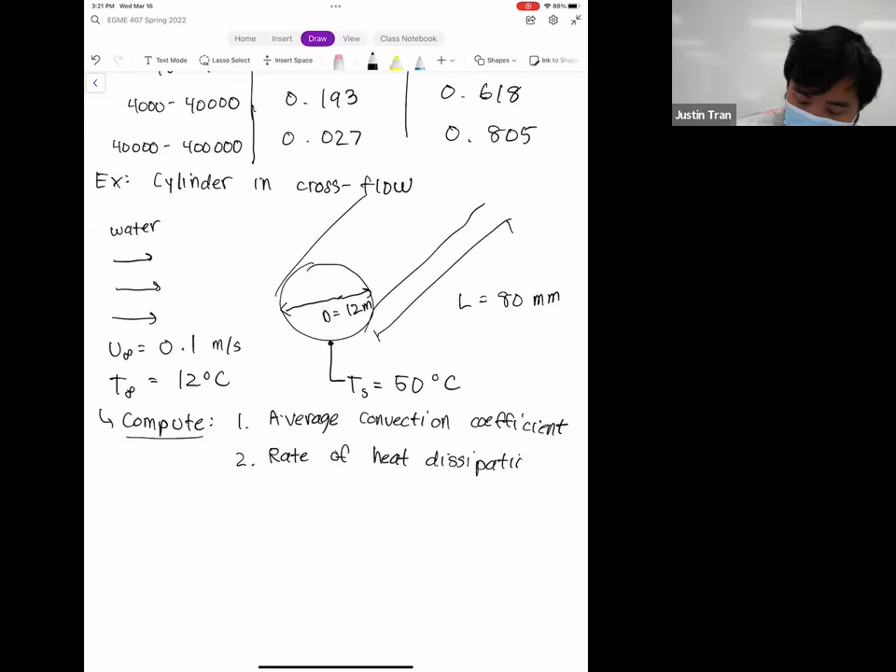So this is a more classical problem where we have all the fluid properties, and what's unknown is the convection coefficient. We can follow basically the recipe from start to finish, and by the end of that recipe we'll have our convection coefficient. Any questions on the setup for this example?

Okay, all right, so let's get into it then. First, let me say convection recipe. All right, so step one of the recipe is to identify our geometry.

So far we only have two options: either a flat plate or a cylinder in cross flow. You can see here that this one is a cylinder in cross flow. Okay, so let's go ahead and write that down.

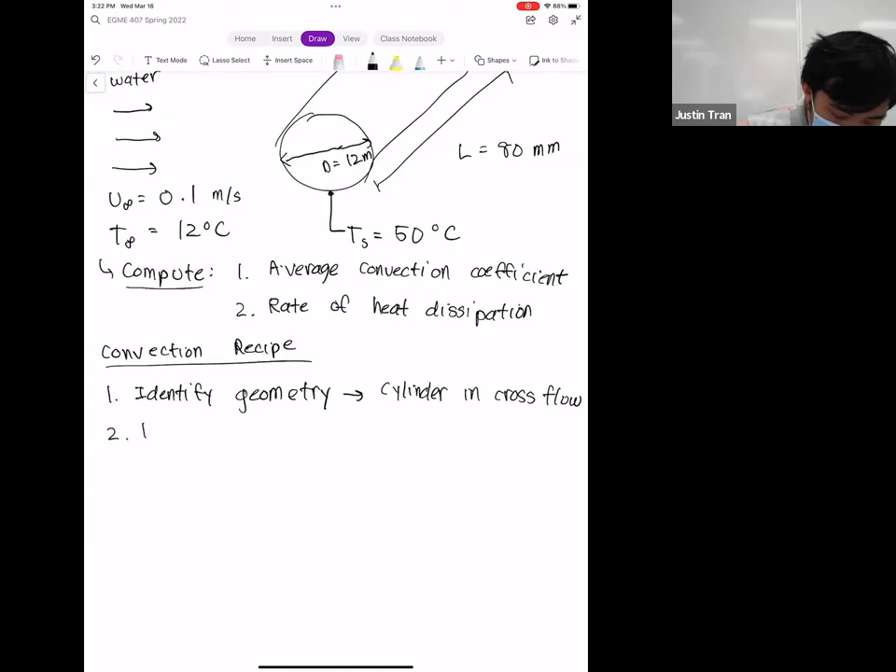Right, so next let's compute the film temperature. Our film temperature is just the average between our fluid temperature and our surface temperature. So we take 12 degrees C, add it to 50 degrees C, divided by 2, and what we get is 31 degrees C.

Now that we know the film temperature, we can evaluate the fluid properties. In this case we have water, so make sure you know what fluid you're working with. If you're using the textbook, the properties of water are in table A6. If you're using the online calculator, there's a water option too, so make sure you change it to water on the website.

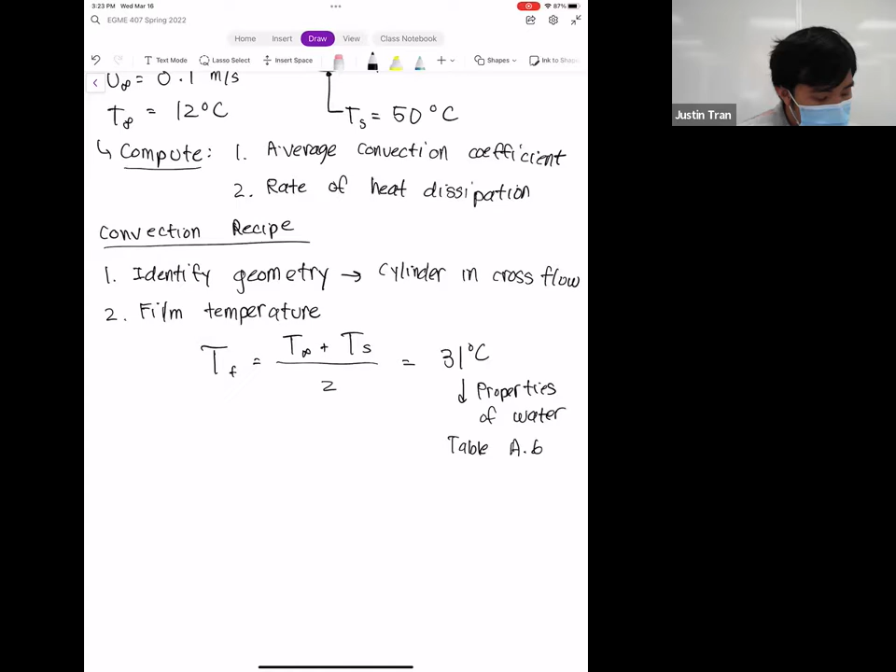The properties of water at 31 degrees C: the kinematic viscosity is equal to 7.73 times 10 to the minus 7 meters squared per second. The thermal conductivity is 0.62 watts per meter Kelvin. And the Prandtl number here is 5.20. So those are all properties that you would read straight off the tables or straight off the website.

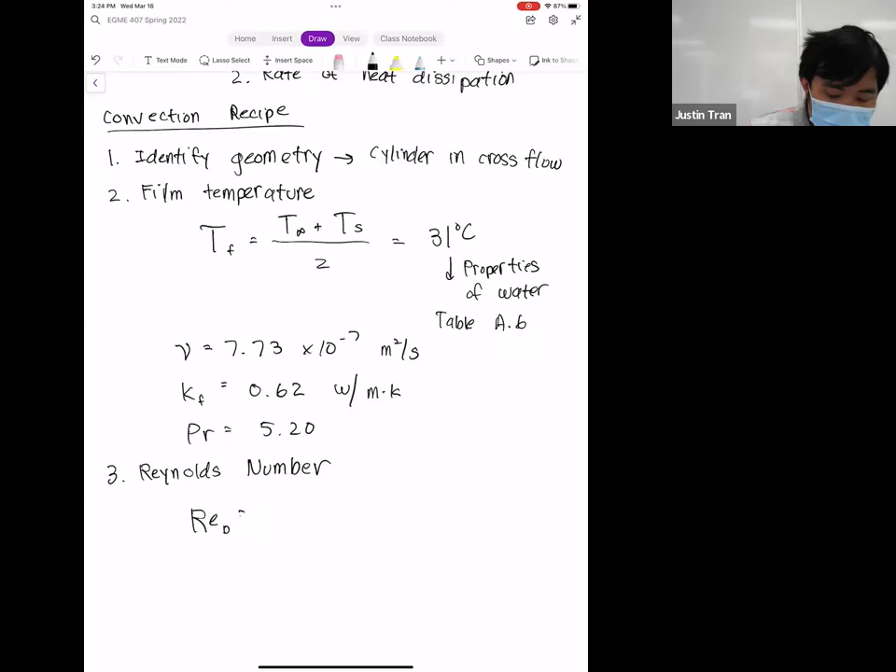All right, so next we're going to compute the Reynolds number. Since we're in a cylinder in cross flow, we compute it based on the diameter. It's tempting, and I've seen people do this, whenever you have a cylinder we're almost always given the length into the page—don't use that length for the Reynolds number. Remember, we use the Reynolds number based on the diameter: U infinity multiplied by diameter divided by the kinematic viscosity.

Our velocity here is 0.1 meters per second, our diameter is 12 millimeters, and our kinematic viscosity is just given right above. If we plug all those in, we get a Reynolds number of 1552.4.

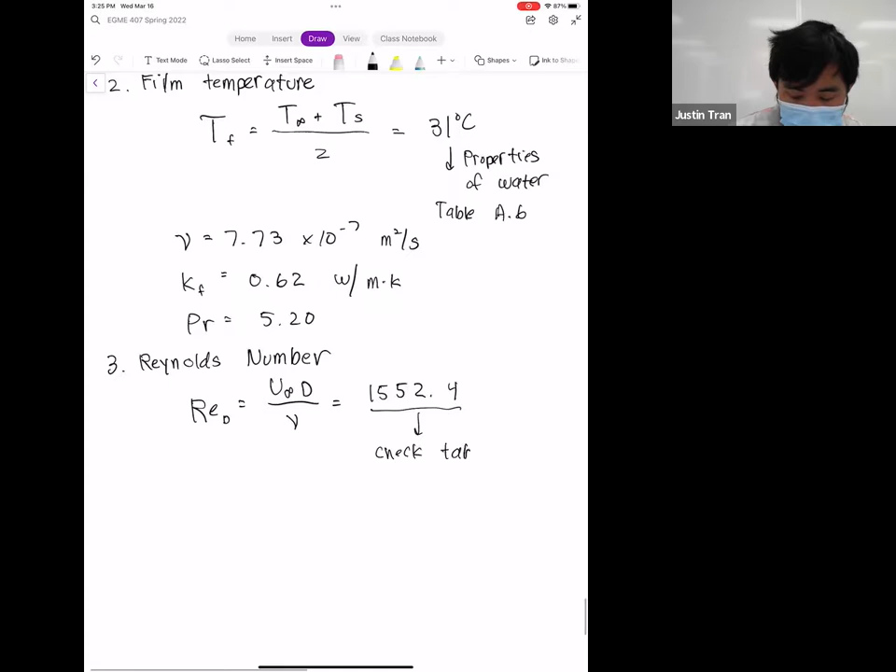Now that we know the Reynolds number, we can check the table. For a cylinder in cross flow with a Reynolds number of about 1500, that puts us into this middle regime. Since our Reynolds number is between 40 and 4000, the C value for this is 0.683, and our M is 0.466.

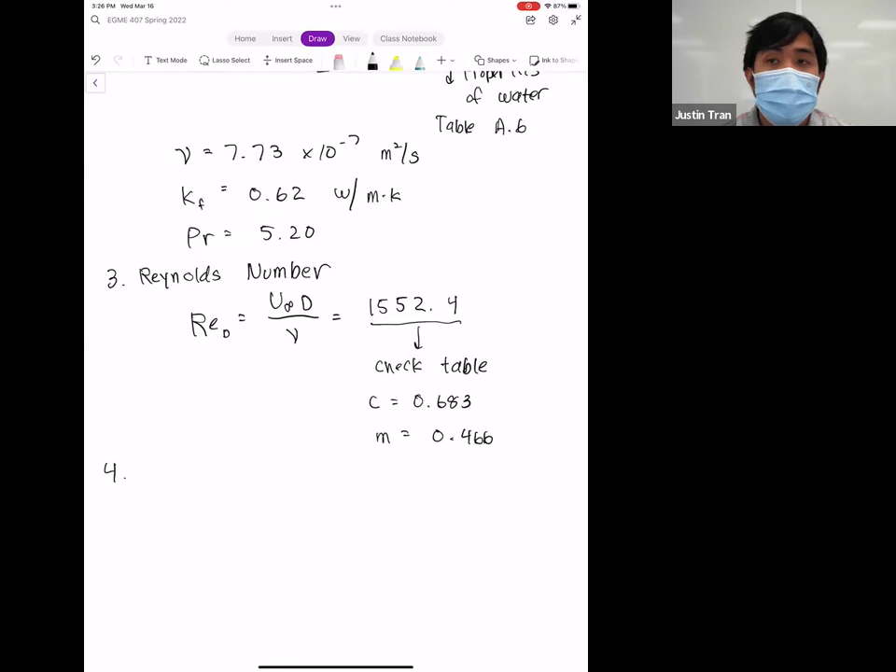Any questions? So for the cylinder, we have a little bit more granularity, so it's difficult to call it just laminar or turbulent. I would consider this pretty laminar because the Reynolds number is pretty low, but we have the wake region to consider as well. Because of that wake, it complicates things where you can't really say it's just laminar or turbulent. But usually, if I had to label it, I would consider these first three laminar, and the last two turbulent.

Okay, step 4: decide if we want local or average. Here it doesn't really matter because we only have one Nusselt correlation anyway, so we don't have a choice. We're going to pick average.

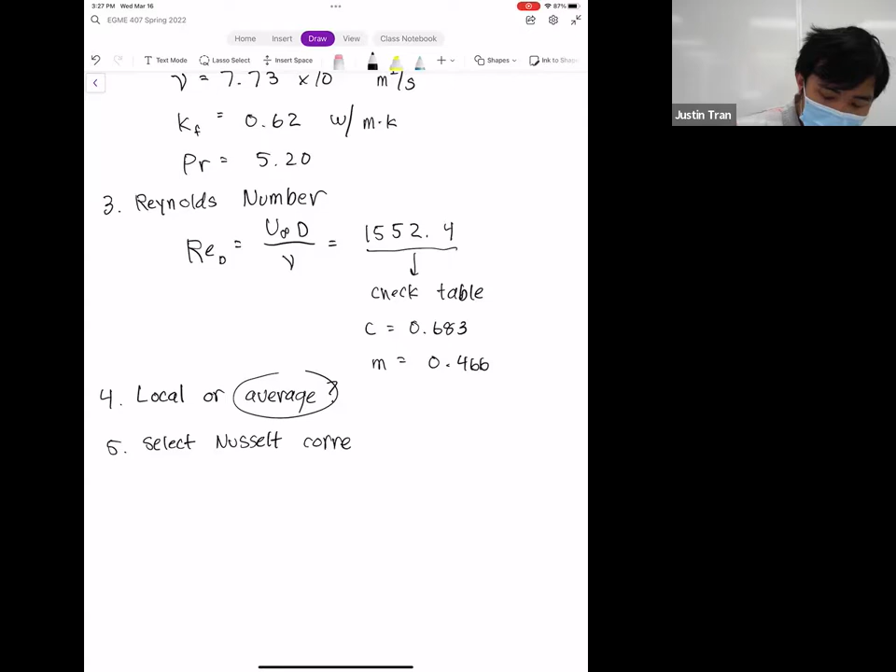The final step is to select our Nusselt correlation. Since we're in cylinder in cross flow, our Nusselt number is C times the Reynolds number based on the diameter to the M power, times Prandtl number to the 1/3. We've already computed the Reynolds number, so we plug that in, and from the table we know the values of C and M. Plugging all that in, we get a Nusselt number of 36.32.

We can then use this Nusselt number to compute H bar, because we know the definition of the Nusselt number is equal to H bar times the diameter divided by the thermal conductivity. From our correlation, the Nusselt number in this case is 36.32. So let's solve this expression for H bar: H bar is equal to 36.32 times the thermal conductivity divided by the diameter.

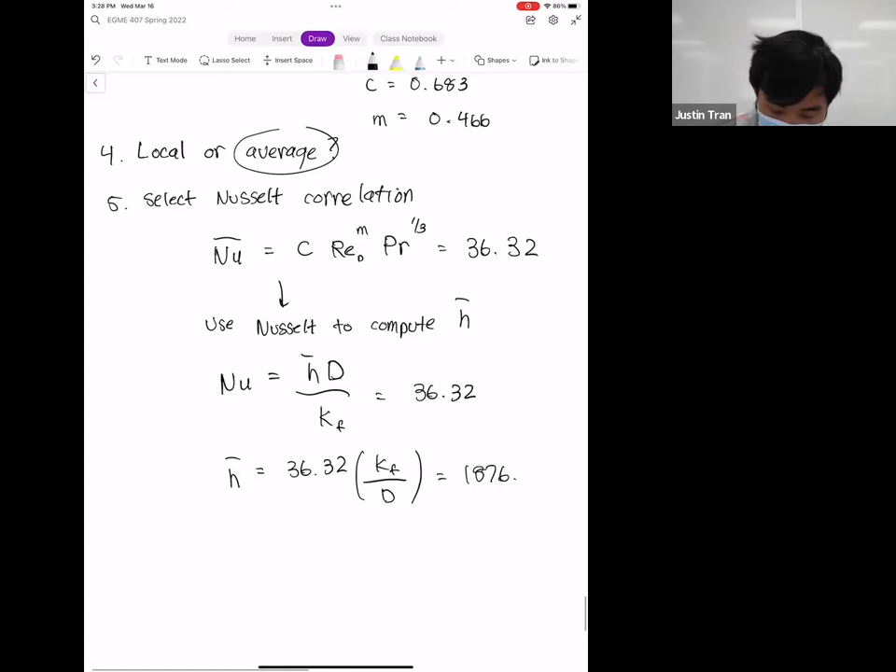If we plug those values in, mostly because the diameter is so small, what we get is an H bar of 1876.53 watts per meter squared kelvin.

And so that's part one of the problem. The part one of the problem is to find the convection coefficient, and we just followed our convection solving recipe to compute. This is a little bit more traditional in terms of what you can expect to see from a convection problem. I think problem 2 on the homework kind of follows the same process, but for a truck instead of a cylinder.

Any questions on how we obtain this result here?

Now that we have the convection coefficient, let's go ahead and use that to find the other thing. Remember, the other thing that this problem asked us to find was the heat dissipated by the cylinder.

As always, whenever we're computing heat transfer in a convection situation, we're going to use Newton's law of cooling. So the heat dissipated is going to be H bar multiplied by A times the difference in temperature.

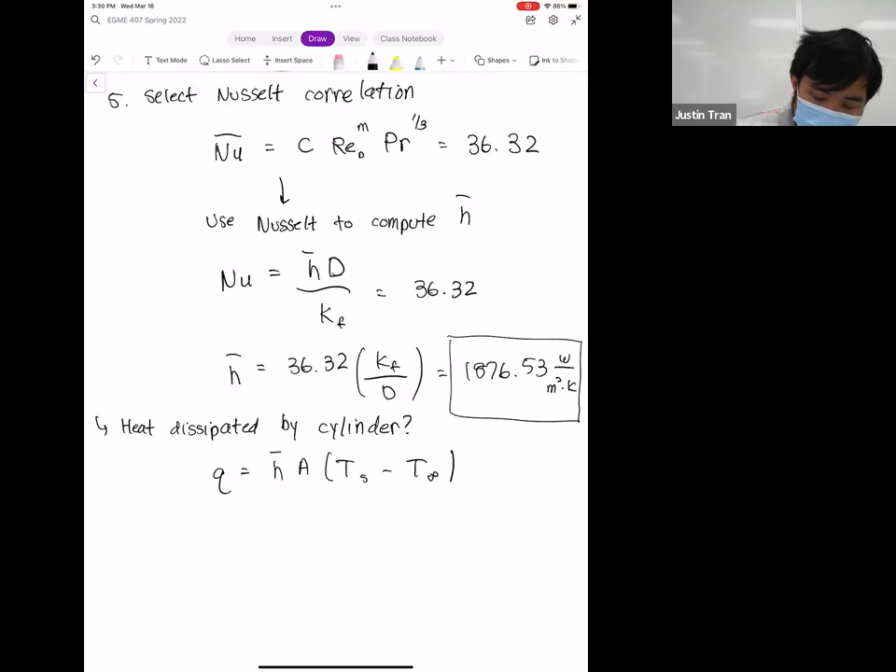We just computed H bar, so we have H bar. We know Ts and we know T infinity. We can also compute A based on the geometry of the cylinder.

This A here is going to be the surface area of the cylinder. The way we're going to compute it is we're going to take the perimeter of the circle and then multiply by the length. So this is going to be pi d times L.

And so we plug all that in. We have our H, we have the diameter, we have the length, we know what pi is, at least up until the 5th decimal for myself. So we plug all that in, and we get a heat dissipation rate of 0.645 watts.

Any questions on that example there?

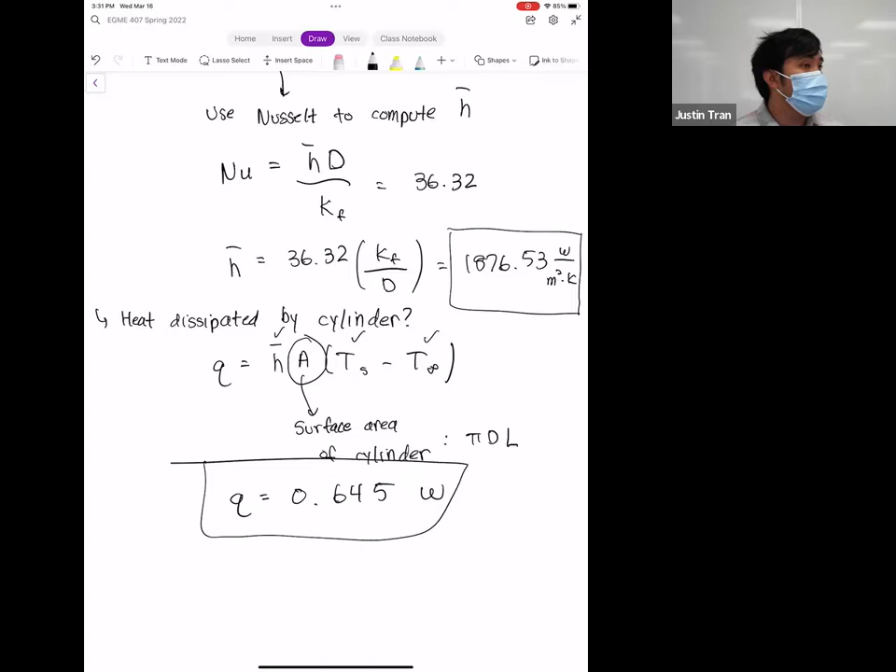You can consider it like that. The direction of heat is kind of just relative to whatever direction you put the arrow in. Usually if you define the heat to go from the hot surface to the cold one, in this case it would be like that. If you draw the arrows like that, then it would be positive. For most of this class, we're considering heat as kind of like a scalar almost, so the sign just kind of indicates which direction it's going to go - either one way or the other.

Question: for step 4, why did I choose average and not local? In what case do we choose local? Good question. For most of this class, we're going to choose the average Nusselt number, because what the average allows us to do is compute heat transfer from an overall system.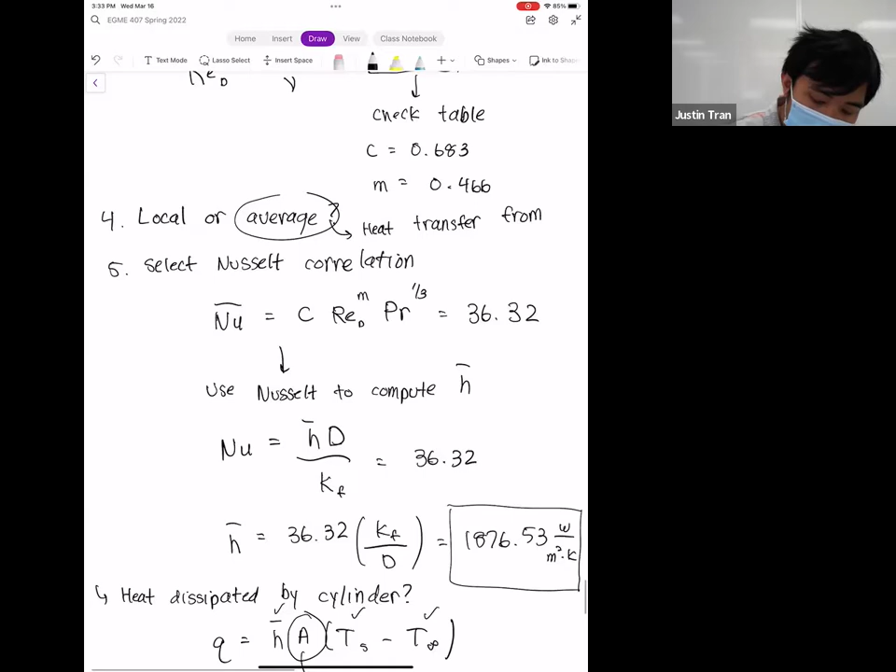A local Nusselt number will be useful if you want to compute the heat transfer from a specific point. If you want to compute the heat transfer from that specific point only, then that's when you would choose local. But for this class, just because of the nature of the problems that we can do by hand, most of the time we're going to look at thermal systems as a whole.

Practically speaking, this is kind of beyond this class, but the only time where you're really interested in a local Nusselt number or a local convection coefficient is really only when you're doing simulations. If you're doing a heat transfer simulation, that's the only chance when you look at local, because otherwise the calculations become a little bit too heavy for a normal person to do. If you're doing hand calculations, average is going to be what you're going to be looking at most of the time.

Any other questions on this?

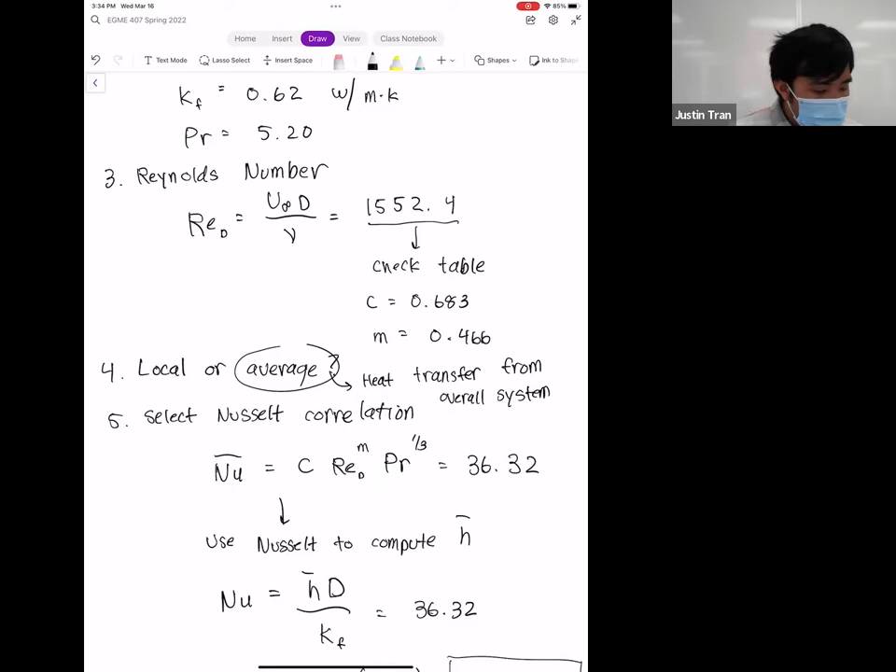Before we move on to internal convection, I did want to make a quick comment on one of the homework problems. This is going to be problem 3. It's not about this problem specifically, but it's for situations like this. Let's look at situations when you have flow on both sides of a plate.

So far we've only considered flow on one side of a plate, but it could happen that if you have a plate that's very large, you can have different flow conditions on one side or the other. Let's say on the top side you have a certain velocity, a certain temperature, and certain properties, so a certain thermal conductivity, viscosity, and Prandtl number.

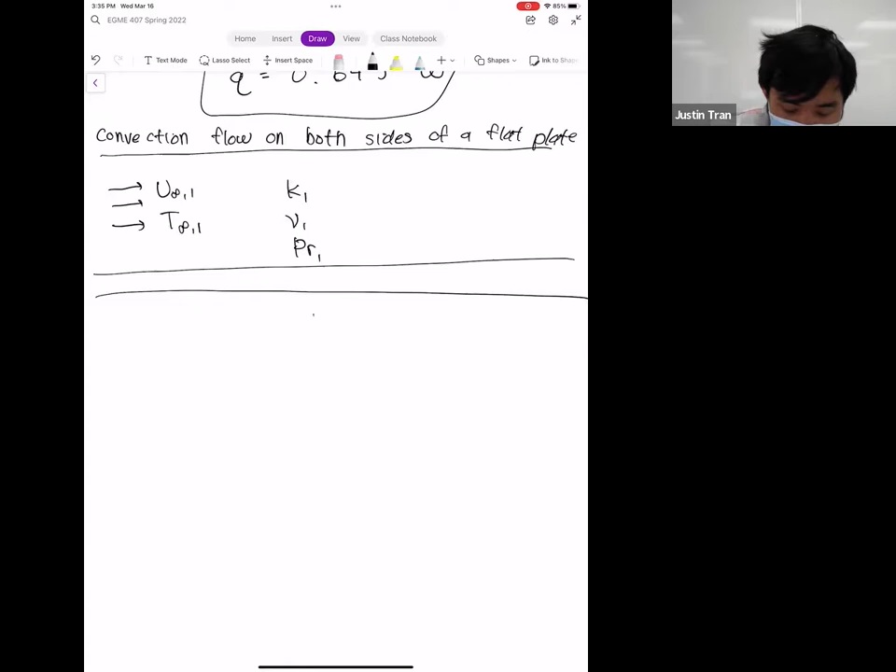But maybe this glass, in this case we'll assume it's glass, is separating you from a very different condition on the other side. On the other side you might have totally different flow conditions. The flows don't necessarily have to go in different directions, but I drew them that way just to emphasize it.

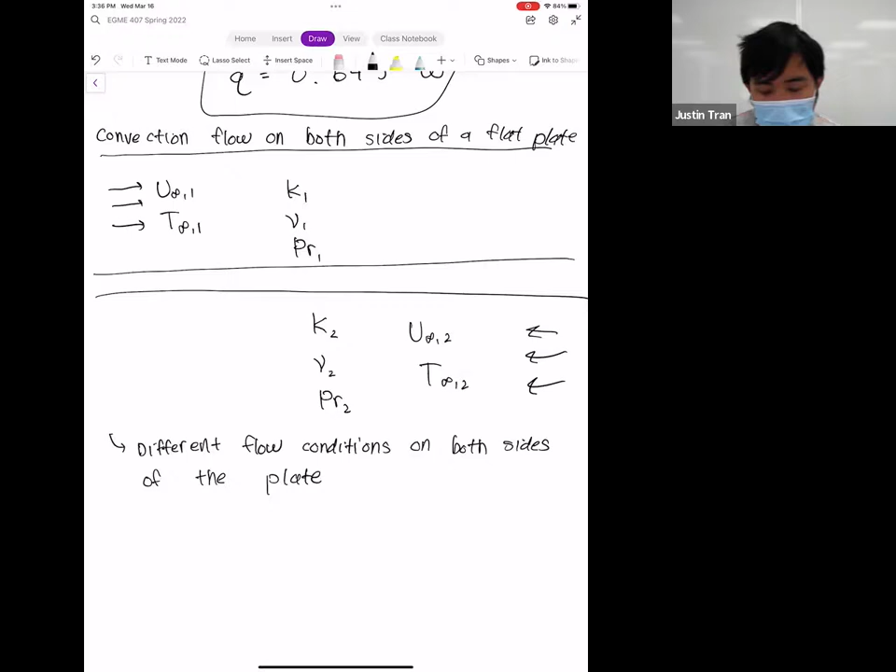In the homework, the situation I'm having you look at is a car defroster. Nowadays it's more common, but if you get into your car early in the morning, you can't see out because it's all frosted up. So to fix that you turn on your defroster, which involves turning on the AC or heater inside your car. What you have is a very different thermal condition on one side versus the other, but on both sides you might have some airflow.

Another situation I just thought of, since I've been wanting to go to the aquarium, is that this can model the glass that separates you from a shark on the other side of an aquarium. The shark sees a very different kind of flow situation - they have water flowing, but on your side you have air. That's another example I can show you.

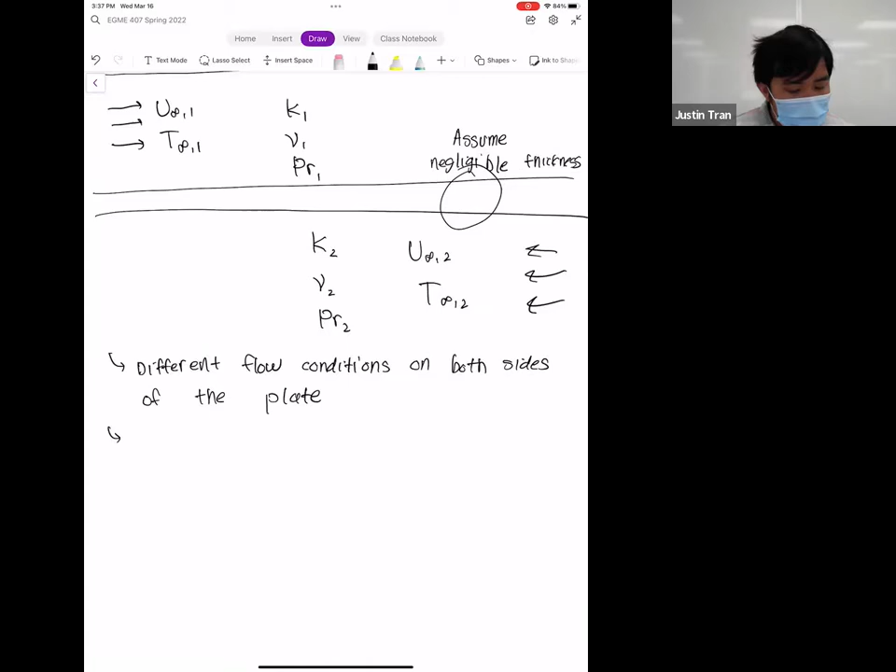In these situations, what we assume most of the time is that the plate, or the separating surface, has negligible thickness. In other words, the solid plate is not going to contribute thermally to the situation at all. For these situations, what happens is that you almost have a direct transfer of heat from one fluid to the other.

Let's say, for instance, that T infinity 2 is greater. So what you have is a net transfer of heat that comes out from the bottom fluid and goes into the top one. If the plate isn't thick enough to contribute thermally, what you have is Q convection 2, which represents the amount of heat leaving the second fluid. This has to be equal to Q convection 1, the amount of heat being gained by the other fluid through convection.

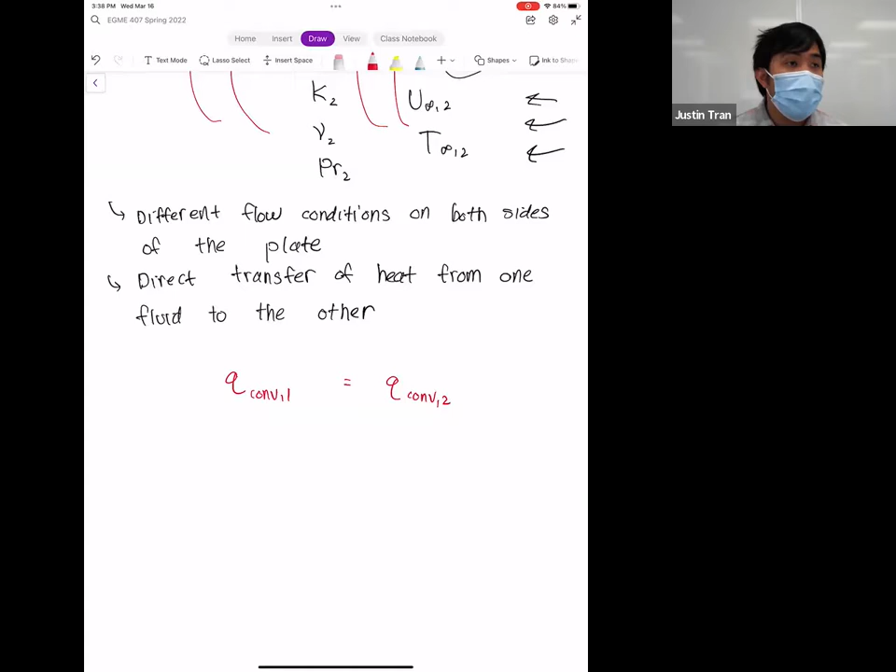If we substitute Newton's law of cooling into this, we get the following. On the left side we have H1 bar multiplied by the area times Ts minus T infinity 1. This has to be equal to H2 bar times A times, since we're assuming T infinity 2 is greater, T infinity 2 minus Ts.

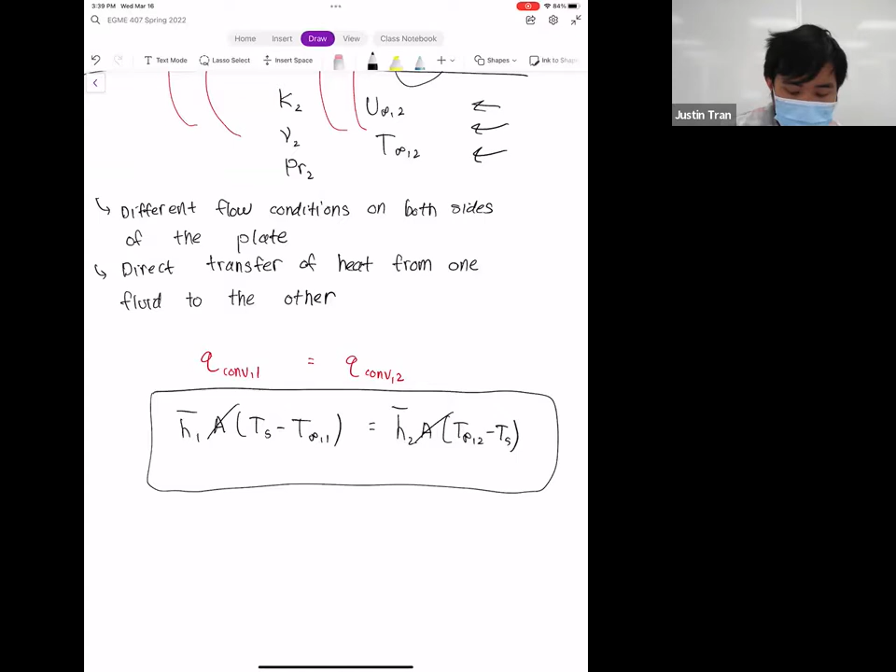Since these two fluids are interacting through the same plate, the areas are going to be the same, so we can cross out the areas, and we end up with the following expression. In these types of problems, you're going to basically set the two convection heat transfers from the two fluids directly equal to each other.

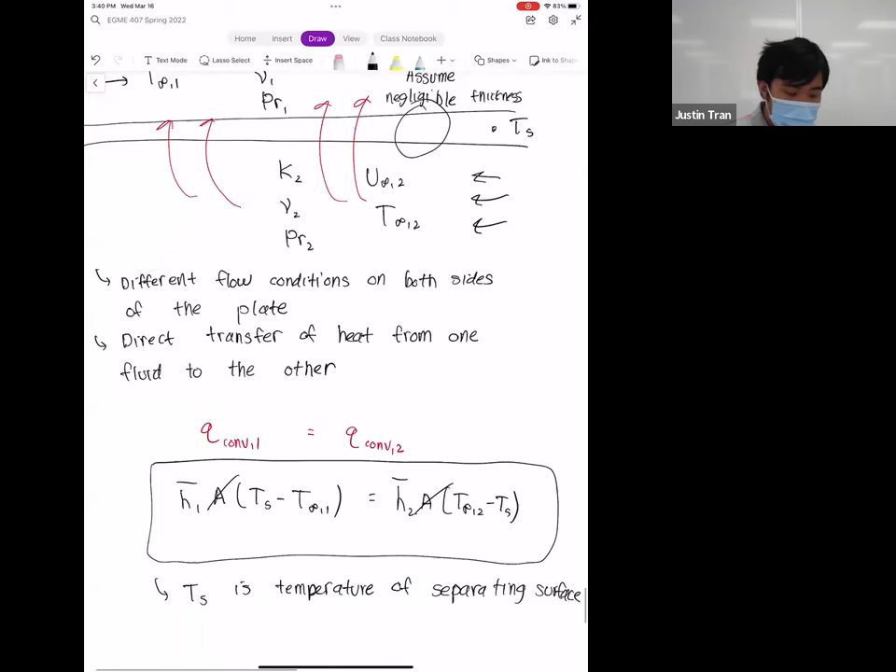Ts is the temperature of the separating surface. If I go back to this diagram, we assume that the plate has a temperature of Ts, which is kind of like the in-between temperature between the two fluids. If you have that set up, you should be in good shape for that homework problem.

The funny thing is, the first time I did that problem, when I had the incorrect answer, the solution wasn't that reasonable, but it was at least realistic. Now that I've corrected my solution, the situation is not so realistic, so just keep that in mind. You're going to get a temperature for the inside of your car that is not physically possible, but just keep that in mind.

Any questions on any of this?

We have 4 minutes left, so let me introduce the idea of internal convection, and we'll really get into it next week. At the very least, what I want to communicate to you is what makes internal convection different from external convection. When I mention internal convection, these are situations when you have flow that's on the inside of two bounded surfaces.

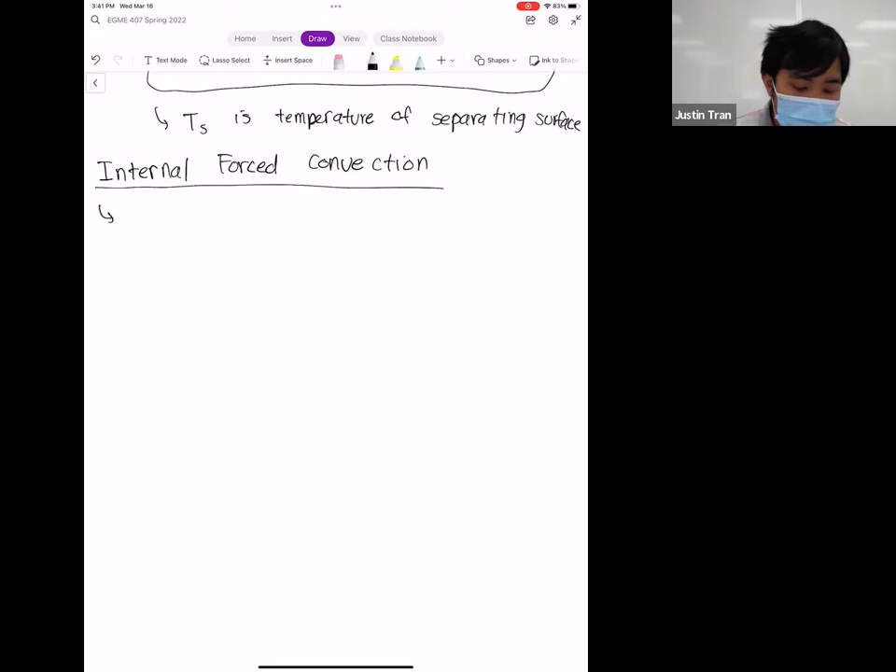At least two bounded surfaces.

So normally what we have here is our free stream conditions. We have our fluid with velocity u infinity, temperature T infinity.

Before, what we said was that this flow is striking this flat plate, and it was striking it in such a way that the boundary layer on this plate can grow unimpeded. So this was external convection.

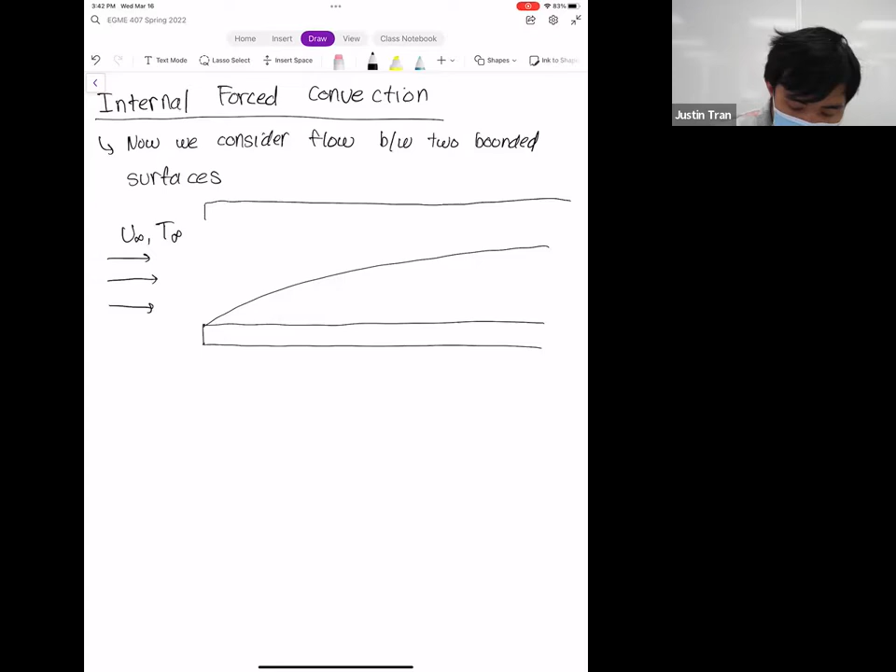For internal convection, we're going to put another surface on the other side. That's what I mean when I said the two surfaces are bounding, so they bound the flow in between them. What's going to happen here is that once the flow hits the ceiling, a boundary layer is going to form on that as well.

And so the important difference, let me redraw this a little bit. The important difference is that if you look at the boundary layers from the bottom and the top, eventually they're going to meet.

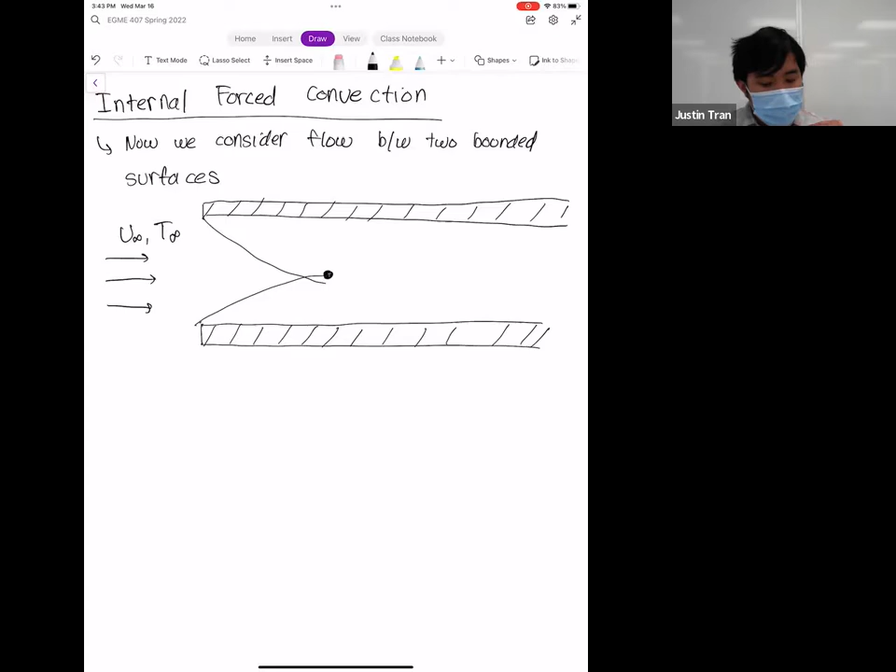And it'll meet in such a way that the entire internal flow will be inside the boundary layer. So why is this important? Remember, the boundary layer was kind of the transition region between the surface conditions and the free stream. But if our two boundary layers meet, and we look at the flow on this area over here, on the right, we've lost all sense of the free stream. So we've forgotten what U infinity and T infinity are.

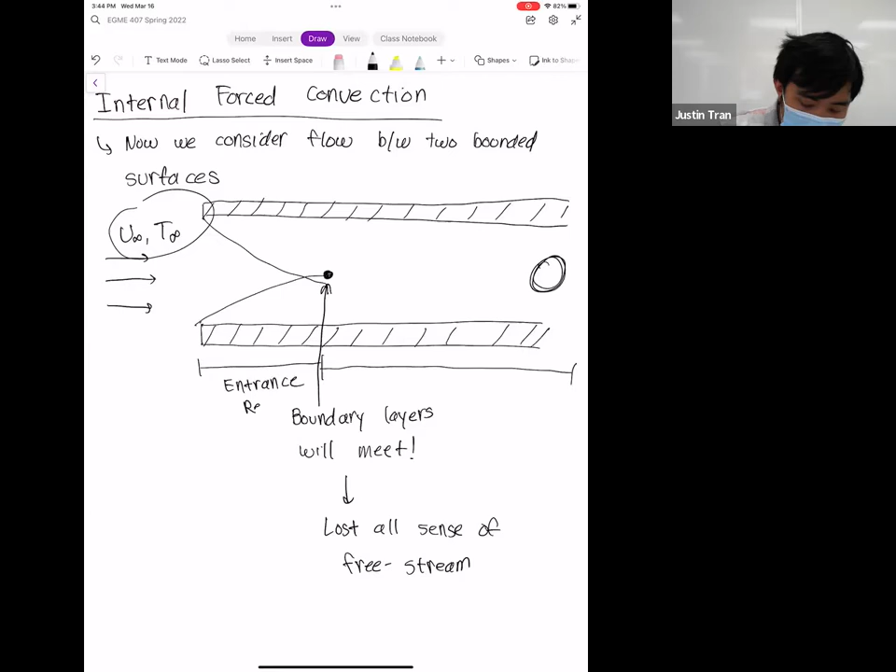And so that kind of shifts how we think of these problems. Instead of thinking of them as the surface versus the free stream, we have to reform how we're thinking. In fact, we have two different regions here. At first we have this region, before the boundary layers meet - we call this the entrance region. And then once the boundary layers meet, we have this other region, which we call the fully developed region.

For this class, we're going to focus most of our attention on this fully developed region, just because the fluid mechanics and the thermal stuff is a little bit easier there than the entrance region. So any final questions on this before we wrap it up for the week?